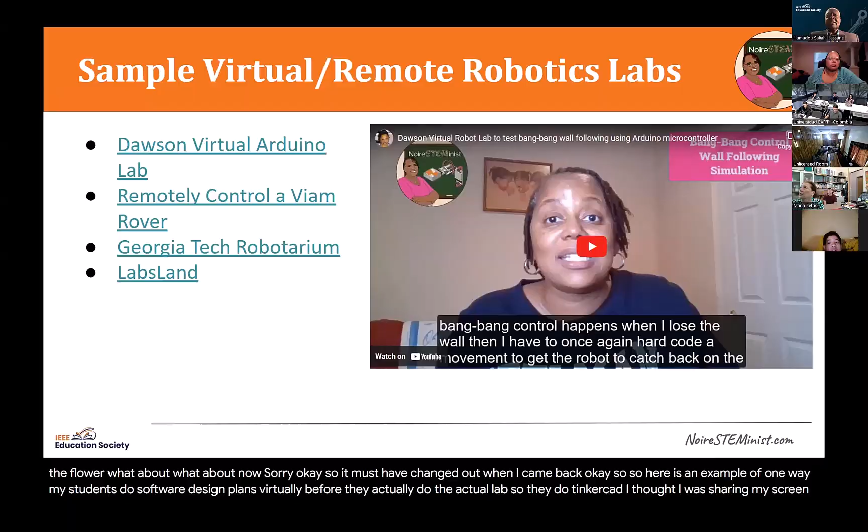Sorry, Abdulaziz, you are sharing your screen. Please stop. I thought I was sharing my screen. Yeah, but I saw someone from Niger sharing the screen. I cannot see your screen. Okay, I'm going to try it again. Let me try one more time and tell me what happens. I turned off multiple sharing. So now, what about now? What do you see now? Now we can see you. Okay. All right, Maria, did you need something as well? No, I'm good. I was gonna say something about the interruption. Oh, okay. It looked like Abdul was sharing something. I have now turned off sharing, so I'm the only one that can share. Perfect. Okay. So let me get the chat back open now.

Sorry about that. Okay. So here's an example of how my students do a pre-lab using learning objects online before they do the actual physical lab on the robot. And I will tell you that the robot they use in class is not the one that I shipped everyone. They use a robot that is a bit more expensive, obviously, but still the same thing applies.

So one of the labs they do is called bang bang control or wall following. So here's a simulation of what that looks like. I'm going to forward a little bit because I don't want to play the whole thing, but turns and forward and spin moves until you're within the correct distance to the wall, and then you just move straight ahead.

The other point of bang bang control happens when I lose the wall. Then I have to once again hard code a movement to get the robot to catch back on the wall, and then it goes back into on off until it collects all the coins. Please watch and enjoy.

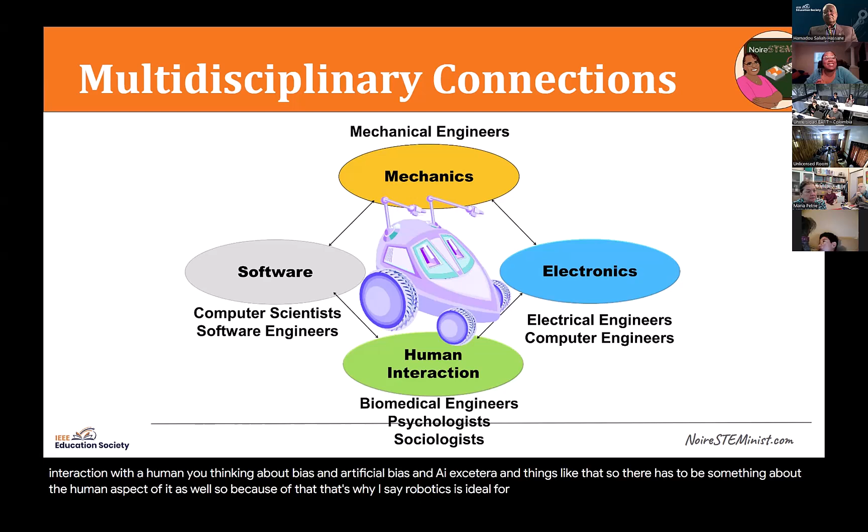And then there is going to be some type of interaction with a human. You're thinking about bias in artificial intelligence, bias in AI, et cetera. So there has to be something about the human aspect of it as well. So because of that, that's why I say robotics is ideal for STEM and STEAM, because sometimes the arts part of it is humanities or ethics, or how does it interact with a human in a way that feels safe, et cetera. So that's why I like robotics, because I can do so many things with it.

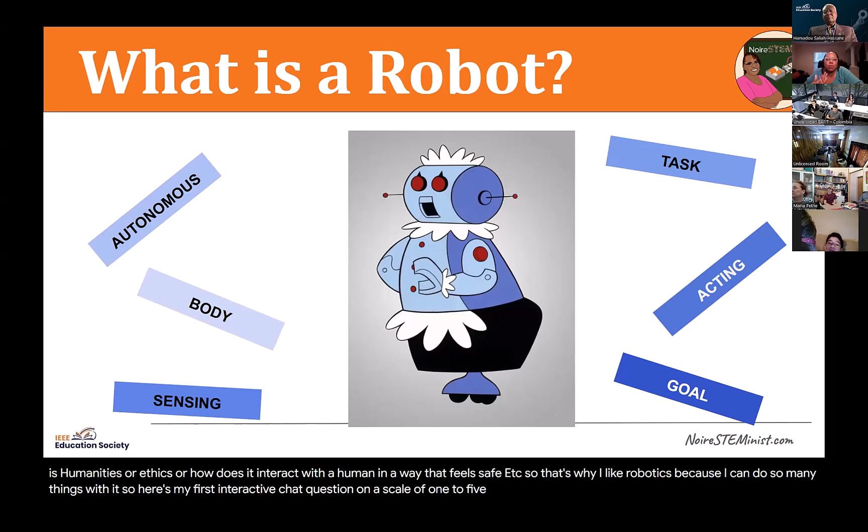So here's my first interactive chat question. On a scale of 1 to 5, with 1 being I know nothing about robots and 5 meaning I know lots about robots, put a number in the chat between 1 and 5. 1, I don't know much about robots. 5, I know a lot about robots. I want to see where the numbers are, because this kind of scales the way that I do my presentation. 1, I know nothing. 5, I know a lot.

I see a 2, 3, 5, 5, 1, 2, 3. I see a lot in the middle. 3, 3. I see threes. Okay, so it looks like people are kind of in the middle. I see 3.5. I do presentations for children and adults, and I use some of the same slides. So the level of detail I go into is closely related to how much I think you know.

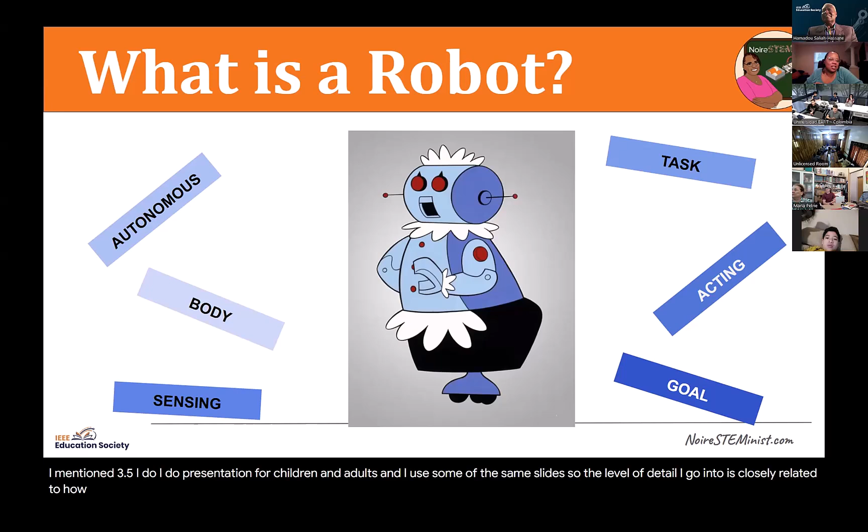So what is a robot? Simply put, a robot is a machine. It is a machine that is given intelligence through software. You know Rosie from the Jetsons? Yes, Rosie was the first robot I knew as well, which is why I have Rosie on my slide.

So it is a robot that is given machine intelligence through software, where the amount of intelligence may be based upon the number of sensors or the diversity of the sensors. Yes, Lost in Space was another big, very popular robot when I was growing up. So it's autonomous. Autonomous is how much can a robot do by itself?

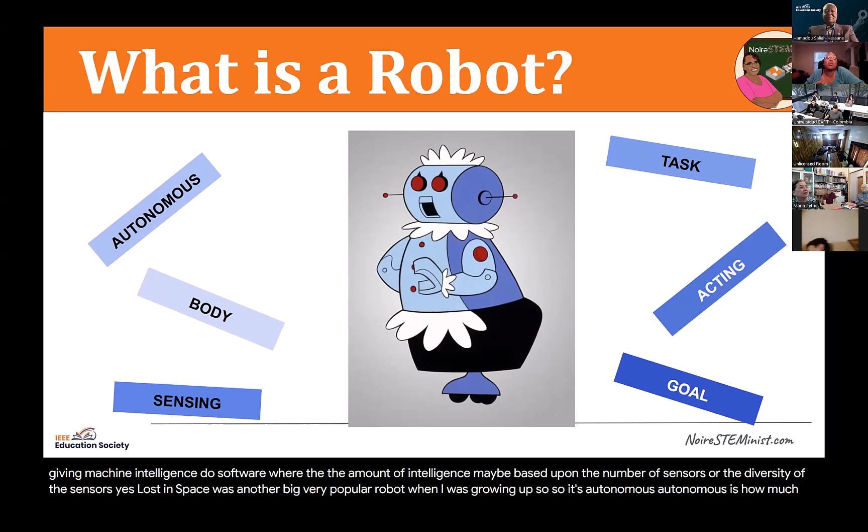If the robot does not need human intervention at all, then it's fully autonomous. That means it does not need help at all. If it's a remote control robot, which means you have to drive it and give it perception, it's teleoperated and it's not autonomous. Most robots are semi-autonomous, which means some things it's programmed to do on its own. But sometimes if there's a perception issue, which means it cannot figure out where it is or what something is, or if it gets stuck, the human may have to step in to help it.

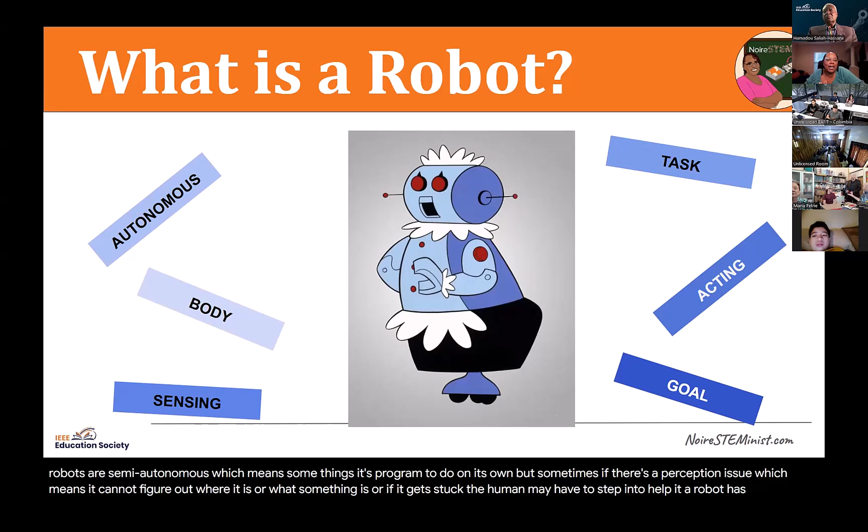A robot has a body. It's very important to state that a robot has a body, because there are things called web bots now. A web bot is a different kind of bot that basically scours the internet and looks for information. So the types of robots we're talking about have a body that is designed based upon what the robot will do. If the robot is going to vacuum your floor, it may be a little disc on the floor. If it is a drone, it may have propellers that fly over a stadium, etc.

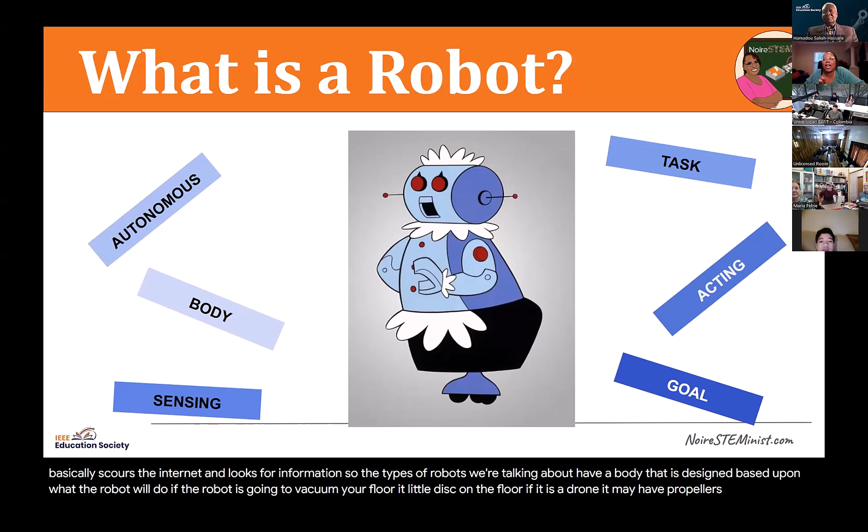A robot also will have sensors. The robot will have sensors based upon the task that it has to complete. So it may have color sensing sensors. It may have temperature sensors. It may have sonar or infrared sensors. So the sensors on the robot give it its intelligence as well, and you select the sensors for a robot based upon what the robot has to do.

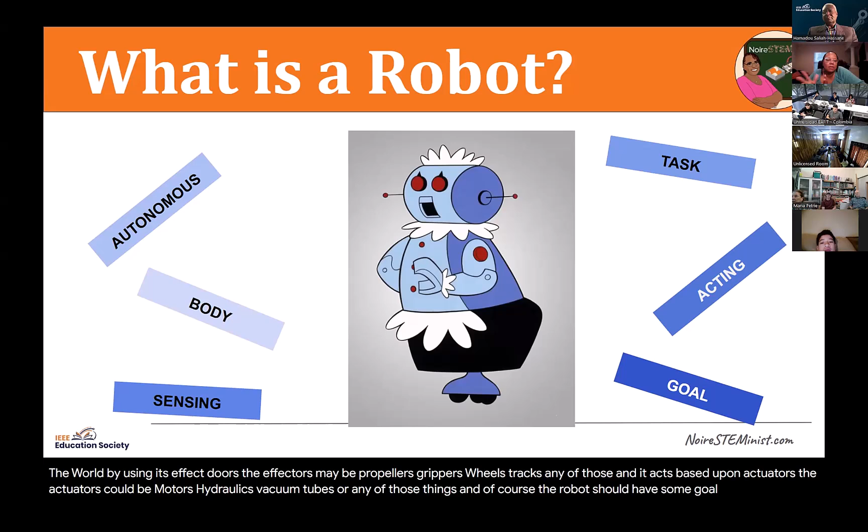Once the robot is given a task, it acts on the world. It acts on the world by using its effectors. The effectors may be propellers, grippers, wheels, tracks, any of those. And it acts based upon actuators. The actuators could be motors, hydraulics, vacuum tubes, or any of those things. And of course, the robot should have some goal. It's not really a robot if it doesn't have anything to do. It's a paperweight, so you have to give the robot something to do.

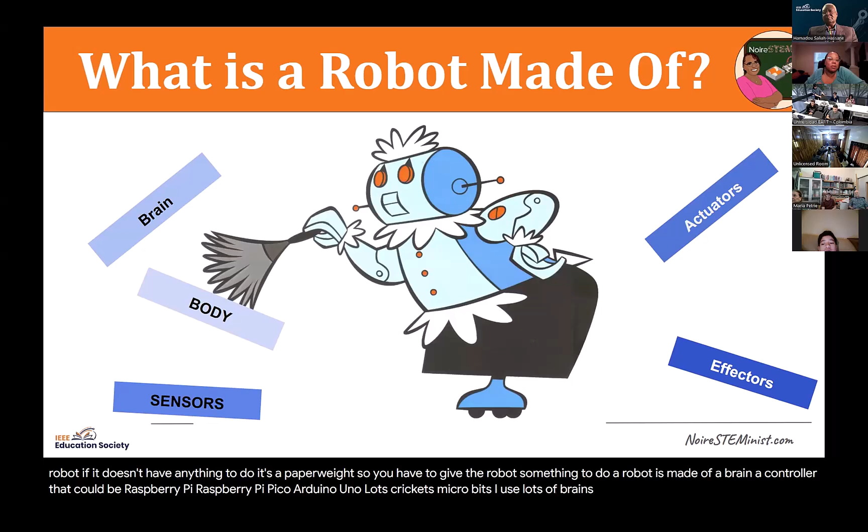Robots are ideal for 3 types of tasks. It's called the 3 Ds of robotics. Tasks that are dull, dirty, and dangerous. Dull task: a manufacturing facility, an industrial manipulator, a robot that is picking up a car door and sticking it on a car all day. That is something that if a human had to do it, one, would not be safe, and it would become dull because they would do it all day and they would start possibly making mistakes and injuring themselves.

Robots are also ideal for dirty tasks. I worked in a windshield manufacturing facility. There was a paint room. A paint room is not a place you want a human working all day because they would inhale those toxic fumes. So painting robots are an example of a dirty task, something you don't want a human to do all day. A dangerous task would be a bomb disposal robot, a robot that is looking for IEDs in the military. That's not something that would be safe for a human to do. Dull, dirty, and dangerous tasks.

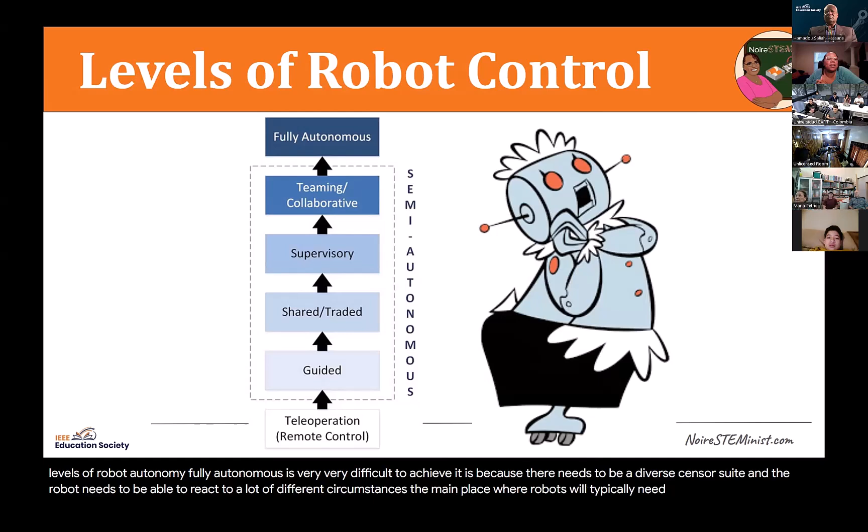So as I mentioned earlier, there are levels of robot autonomy. Fully autonomous is very, very difficult to achieve. It is because there needs to be a diverse sensor suite, and the robot needs to be able to react to a lot of different circumstances. The main place where robots will typically need help is in sensor feedback and perception so that it understands what's going on in its world. A fully teleoperated robot is like a remote control car. A remote control car could be considered a robot, although it cannot do anything on its own.

Guided control means the user tells the robot waypoints where to go next and what to do. Shared and traded control means that the robot and the human are like partners, and they share and trade control based upon being aware of what parts the robot can do well, what parts the human can do well. Supervisory control is where a human supervises the robot and only steps in when it sees that the robot has gotten into trouble, like it may have gotten stuck or it's not making progress towards a goal or a task. Teaming and collaborative robots, cobots, are big right now.

Cobots like the Baxter robot is an example. There's another cobot whose name I cannot think of right now. This would be robots that are like teammates and they actually work next to each other. Sawyer is another. Sawyer and Baxter robots would work next to each other in the manufacturing facility.

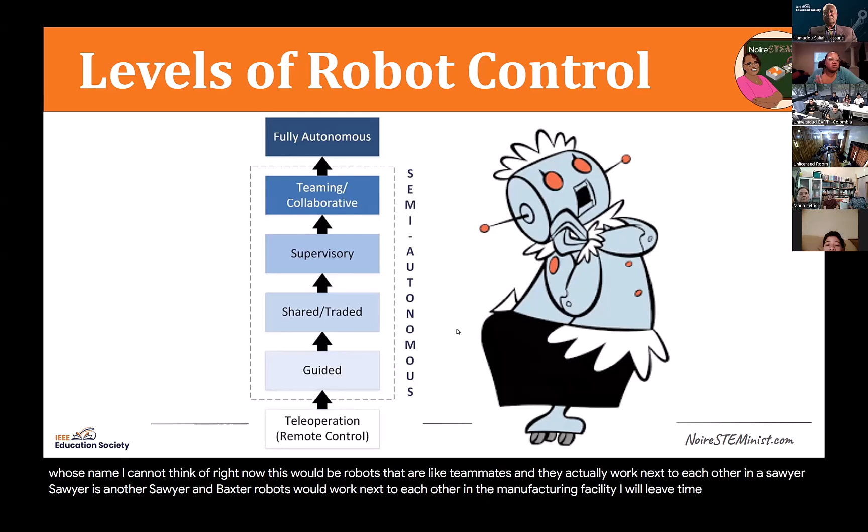So robots use sensors to see the world, such as a microphone to hear, a sonar to see, or a touch sensor on a gripper or force feedback to determine when it has picked something up. So the 3 robot primitives that we use to develop artificial intelligence on a robot are sense, think, act, sometimes also called sense, plan, act. The most important thing is the sensor is integral to a robot's intelligence. If the robot cannot tell what's going on around it, it cannot make decisions independently.

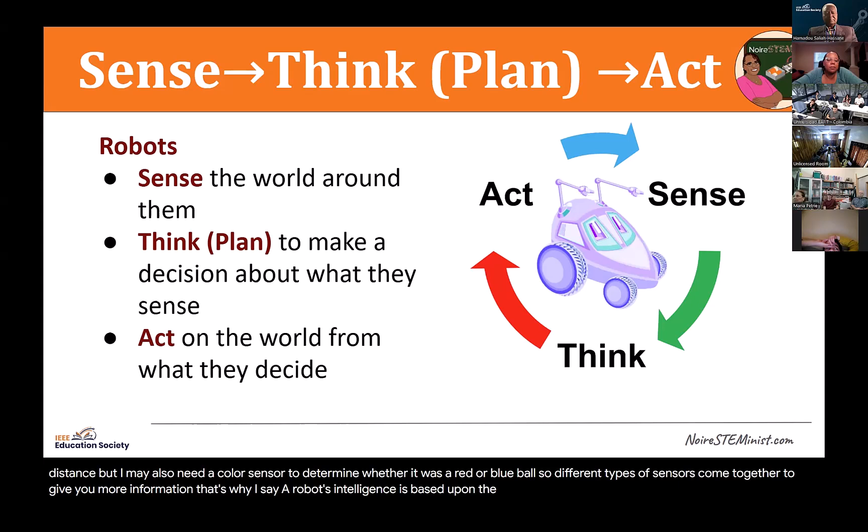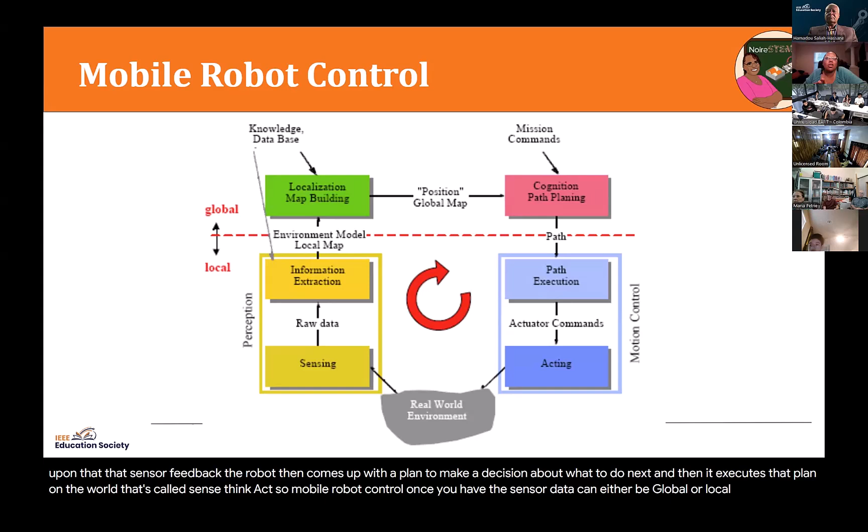That's why I say a robot's intelligence is based upon the number and diversity of the sensors that it has. Based upon that sensor feedback, the robot then comes up with a plan to make a decision about what to do next. And then it executes that plan on the world. That's called sense, think, act. So mobile robot control, once you have the sensor data, can either be global or local. Global control would be a robot that localizes, figures out where it is in the world, builds a map of the world, uses a position in the world to plan a path or follow a path.

Local on the robot is sensing and perception, like I said, sensing the world, using that raw data to get information. In other words, I've sensed something about the world and I know I'm next to a wall and I want to follow the wall. I've sensed something about the world. I saw a red ball and I want to push the red ball into the corner. That's where it takes that data and uses it to make a decision based upon the real world information. And then the action occurs where it either acts on that task or it executes.

So once again, the perception is an integral part of everything it does. A robot is in the real world or a simulated world like I use with my students. It makes a perception or an environmental model. It figures out where it is in the world. It comes up with some kind of cognition of what it wants to do, and then it moves.

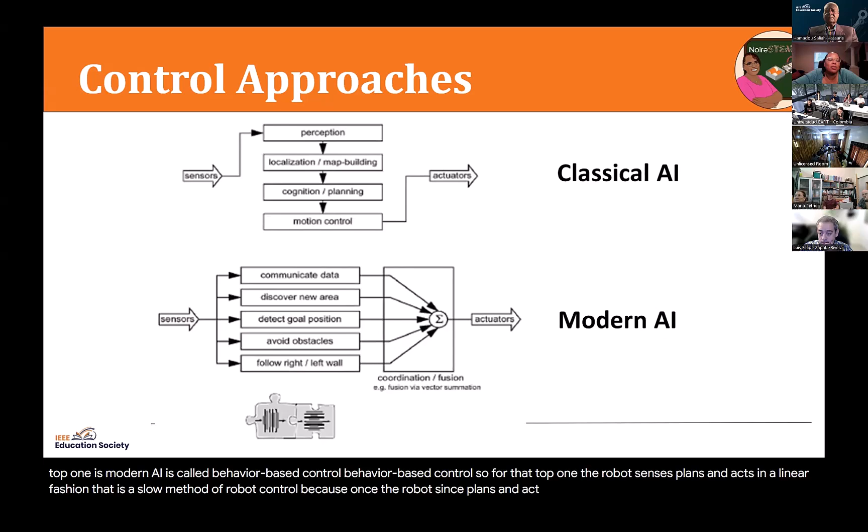There are different kinds of robot control architecture. Classical AI, or artificial intelligence, is called deliberative control. Deliberative control. Okay, that's what that top one is. Modern AI is called behavior-based control. So for that top one, the robot senses, plans, and acts in a linear fashion. That is a slow method of robot control because once the robot senses, plans, and acts, most likely the sensor data has changed. That's why people moved away from classical AI to modern AI, which is reactive control or behavior-based control, because the robot is constantly sensing, constantly getting feedback.

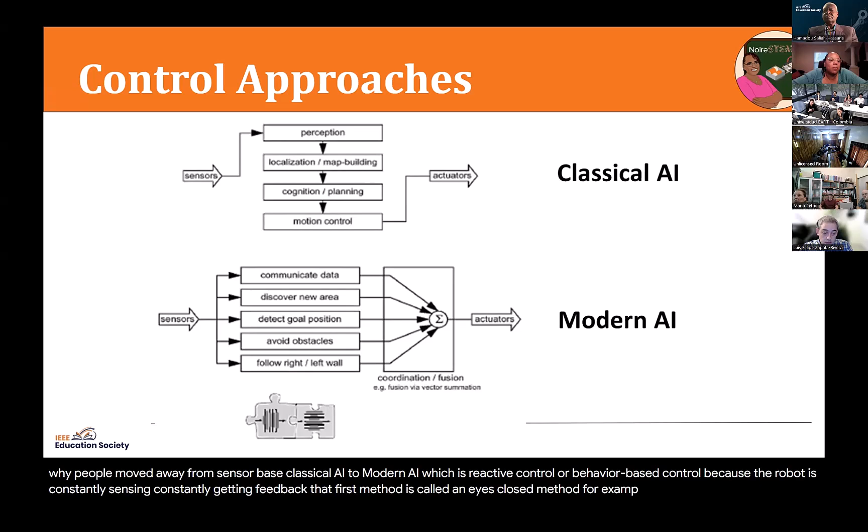That first method is called an eyes closed method. For example, the robot detects a ball, it goes through the whole plan, and then it begins to act on the ball. The ball's now no longer there. Or it detected a person, and then by the time it started to execute the task, the person had walked away.

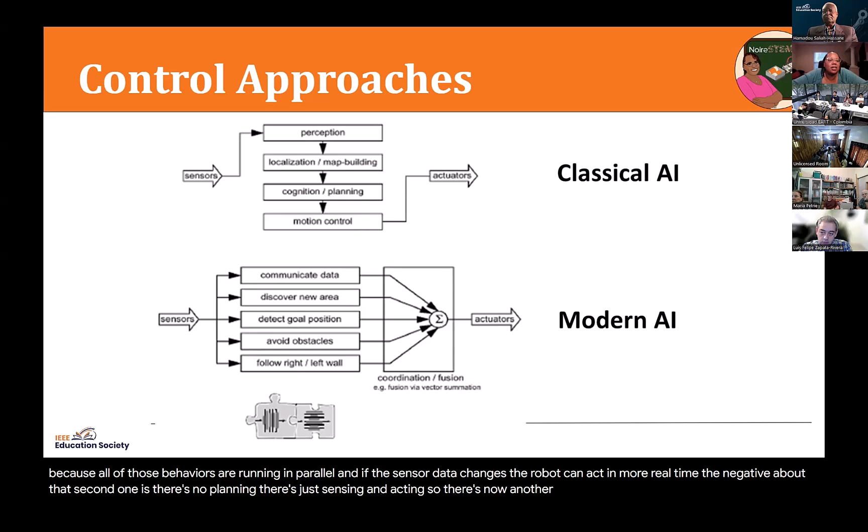So that's why the more attractive one, the one you see developed in the 80s called modern AI, is more acceptable, because all of those behaviors are running in parallel. And if the sensor data changes, the robot can act in more real time. The negative about that second one is there's no planning. There's just sensing and acting. So there's now another kind of control called hybrid control, behavior-based control, where some things are done at the planning level and some things are done at the reactive level.

So here is an example of how you would give feedback to your robot. It's called feedback control. Open loop control for a robot to follow a wall would mean it detects the wall and it just starts driving. If it never measures again, if it's hitting the wall, it has no idea. It doesn't adjust, and it probably is not going to follow the wall for very long. What you would want to do is add a sensor.

So my robot follows the wall, and proportional to how close it is, the robot turns left, turns right, stops, etc. And it is constantly polling sensors to determine where it is. We do this with a microcontroller. So the robot takes the sensor data, measured in terms of voltage, converts that to a distance, and then it uses that with proportional, PI or PID control to determine where it is, okay?

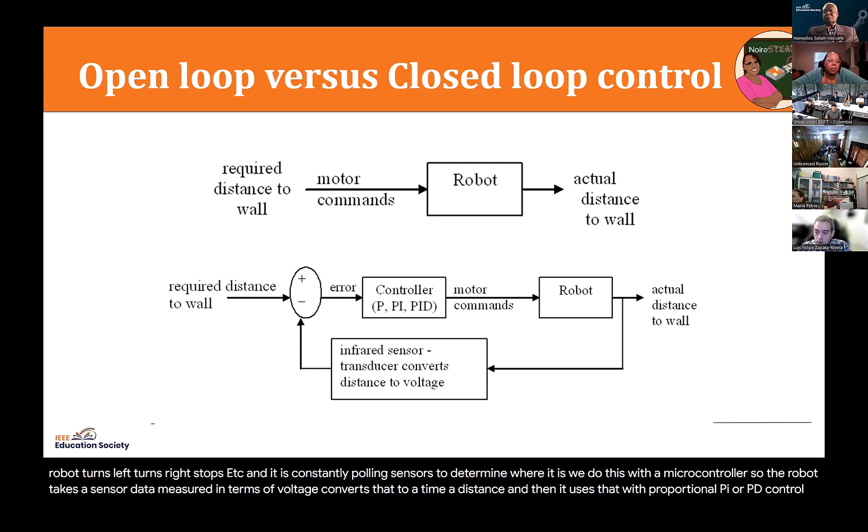Here's an example of what that looks like. I have a robot that is going to follow the center of a hallway. Proportional control has a lot of oscillations. It may get down the hall, but it won't be very centered. Then PI control, it'll be centered, but it has oscillations. So now you're at the integral control, and that gets rid of the steady state error. This is called reset and rate control. The derivative control, the rate, stops the oscillation. Reset, the integral control, corrects for steady state error, okay?

I did not ask for everyone's level, but I'm hoping I'm not giving so much detail about the controls that you're completely lost, but hopefully it makes a little bit of sense to you.

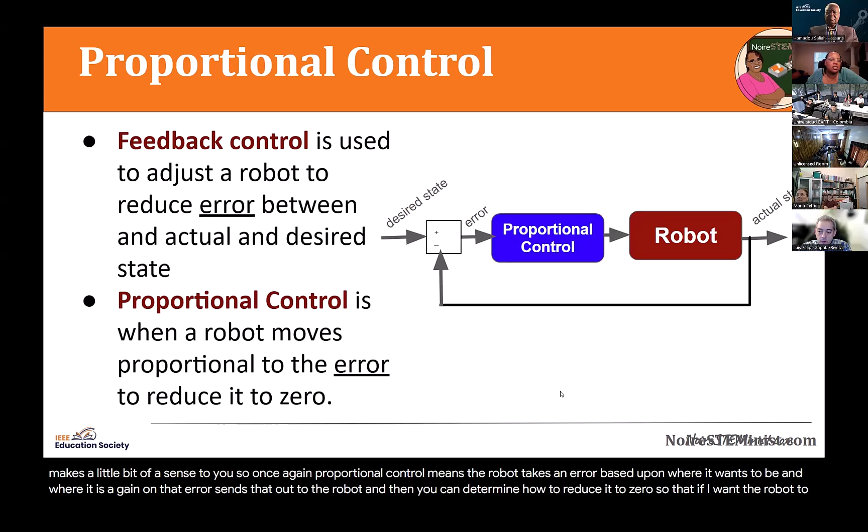So once again, proportional control means the robot takes an error based upon where it wants to be and where it is, a gain on that error, sends that out to the robot, and then you can determine how to reduce it to 0, so that if I want the robot to follow down the center of a hallway, it's able to do that.

Okay, so here's another example of proportional movement where I want to move the robot a certain amount forward, and I use an encoder. An encoder counts robot wheel turns or clicks, and it determines how close it's gotten. And so based upon where it thinks the robot is, how close it is, the robot will adjust in order to move a certain distance.

Another way of illustrating this exact same concept is with a flow chart. I had mentioned earlier that I have my students present their software design plans in different methods, whatever they're most comfortable with. So here will be another way of determining how far a robot moves based on a counter, where you want it to slow down proportional to how close it is to stopping. We know you need to decelerate, otherwise the momentum will carry you past the stop point. So here's a way that you could do that with a counter.

Yes, diagrams are great. I'm a visual learner as well. That's why I show lots of images and videos.

So once again, here's another one where the robot has to move away from something by 10 inches, kind of like wall following, except this is obstacle avoidance, where it's trying to move back to keep from hitting something.

And here's what that would look like as well, where if the robot is within 2.5 inches of an object, it moves away at 100% because it's really close. If it is less than 5 inches, it starts to slow down so that once it gets to 10 inches, it moves slowly and then it stops. So it's just the opposite of the other one. The other one was moving forward at a distance. This one is moving away from an object at a distance.

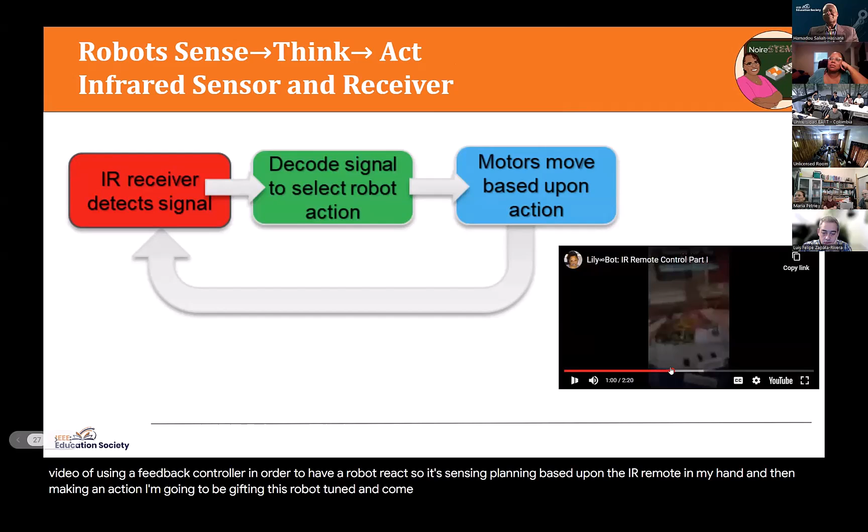Here we have our infrared remote, and then here we have our infrared receiver. And we're going to walk through the things that the robot does, and then we're going to show how to wire it up and write the program. So the power button makes the robot spin. Then we have a volume button, makes the robot move forward. We have a button that makes the robot spin the other direction.

Then we have a button to make the robot go forward. The robot sing and dance. We have another button to make the robot turn. Let's move it back because we don't want little buddy to drive off the table.

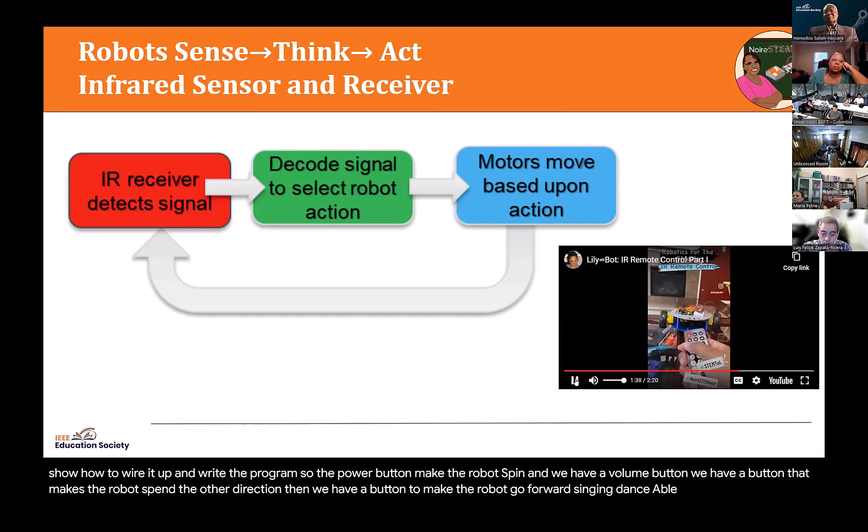So that is an example of sensing, planning, acting. The infrared receiver on the robot is the sensor. I have written the plan out in my code, and when I push the button, the action happens because of my code. Okay, here's another example of this with a light sensor.

This robot has a photoresistor on it, and that resistance changes proportional to incident light. And I have written the code to have the robot act out some type of behavior based upon how much light it sees. You can use this to make a robot that is in love with light or light tracking. These are called Braitenberg vehicles. So it either moves towards the light, it moves away from the light, it runs towards the light, etc.

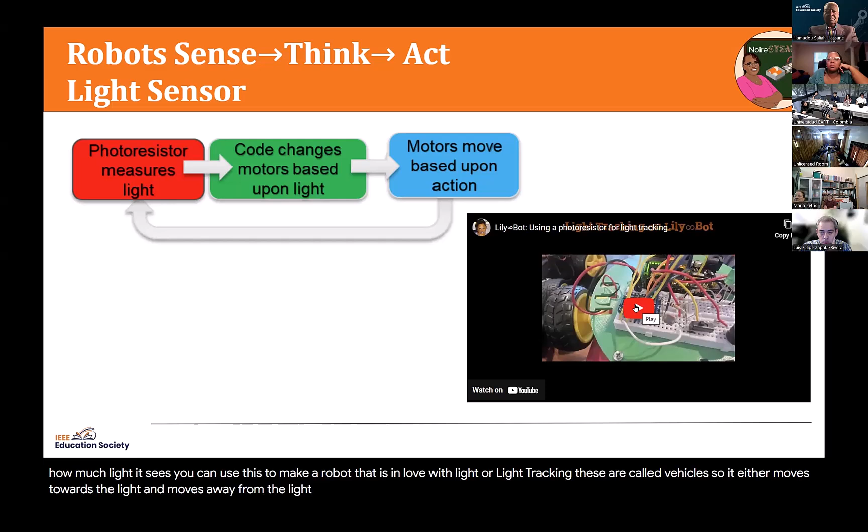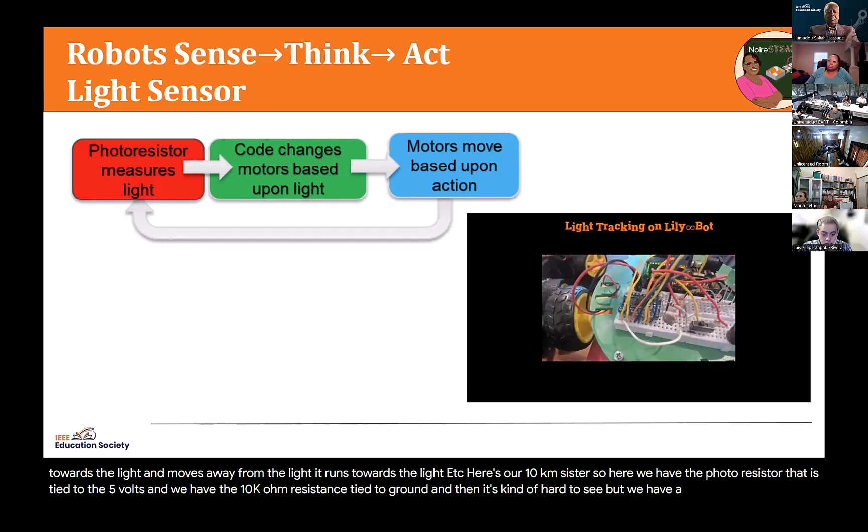Resistor. Here's our 10 kilo ohm resistor. So here we have the photoresistor that is tied to the 5 volts, and we have the 10 kilo ohm resistor that's tied to ground. And then it's kind of hard to see, but we have a blue wire here that goes over to A0.

So first you're going to turn the robot on. And what you'll see is that it immediately starts going at top speed because it's seeking out more light. So when it gets enough light, it stops, which shows love of light. And then if the light starts to dim, it starts moving back because it wants more light. The darker it gets, the faster the robot goes.

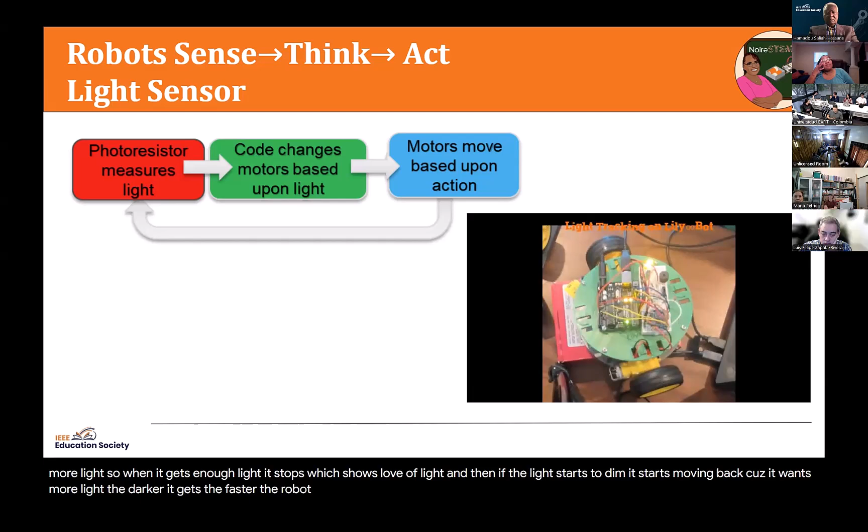So once again, the more light I bring, eventually when it's basking in the light or love of light, the robot stops. But as I take the light away, the robot starts moving. That's an example of proportional control. The robot's motors are proportional to the amount of light that the robot sees.

Okay. So another way of showing robot behaviors is called subsumption architecture or a state machine. A subsumption architecture is layers of robot movement where they subsume or inhibit the other layers by what's going on. This bottom layer is called obstacle avoidance, which means the first priority is for the robot to move safely in the world and not hit anything.

Then if there is light and there's no object in the world, the robot should try to either move toward the light, move away from the light, or be at the light. So the actions are turn and forward. The sensings are move to the light and run away. And these layers happen interactively where they turn on and off based upon if I see light, if there's an obstacle. The obstacle is obviously more important to get away from the obstacle and then to track the light.

So my students also make these kind of software design plans so that when I'm grading their work, I can see what code they wrote and what it should do. And then this table down here explains in more detail. The light triggers the photophilic behavior, and that triggers the motor schemas to move to the light. There's a perception of the light as well as the brightness of the light.

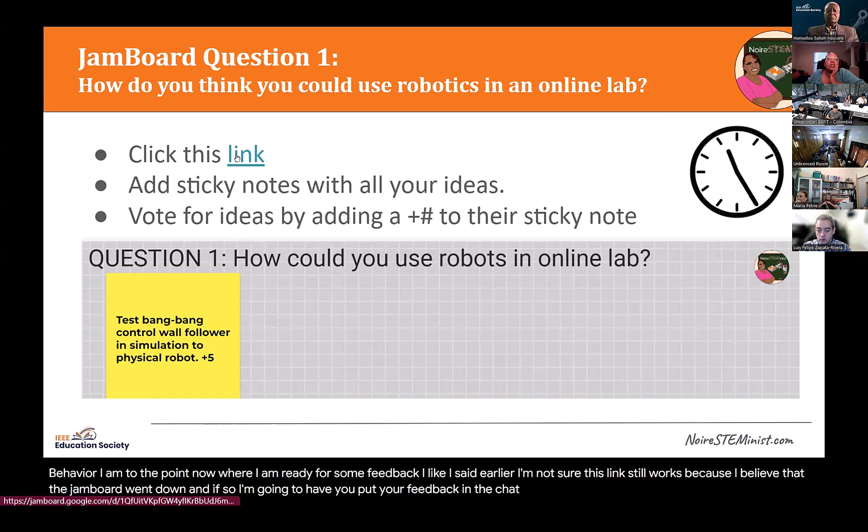Okay, I am to the point now where I am ready for some feedback. Like I said earlier, I'm not sure this link still works because I believe that the Jamboard went down. And if so, I'm going to have you put your feedback in the chat and we're just going to download the chat. But hold on, let me try the link first. And if the link no longer works, then we'll do the chat. Actually, it looks like it's still up.

So I'm about to paste this in the chat and I want you all to take a couple of minutes and go in and answer the question. Now that I've given you some high-level descriptions of robots, how do you think you could use robots in an online lab? You should be able to go in here and make a sticky note and add your thoughts. Notice that we've had some sticky notes in here before.

I'm trying to find the sticky notes. Okay, so it looks like they're getting rid of this on December 31st now. Where are the sticky notes? I don't see the sticky notes anymore. What happened to the sticky notes? Oh, it's under view only. Why is that? Hold on one second. Let me see if I can figure out why it changed to view only all of a sudden. Anyone with the link should be able to edit. Let me try this again. I'm going to put it in the chat. And I'm going to refresh this. I don't know why it's saying view only.

Huh. All right, we may have to end up using the chat. You can view this document; to make changes, ask the owner for edit access. I am the owner. Maybe it was under a different one of my accounts. Hold on one second, please. I have multiple Google accounts, so I have to see why I am not able to. I think they're getting ready to retire it, and they're giving you till December 31st to download whatever you have. But they won't let you put anything on it anymore. I think you're right. Okay, everyone, please put your ideas in the chat. Always taking away our favorite tools.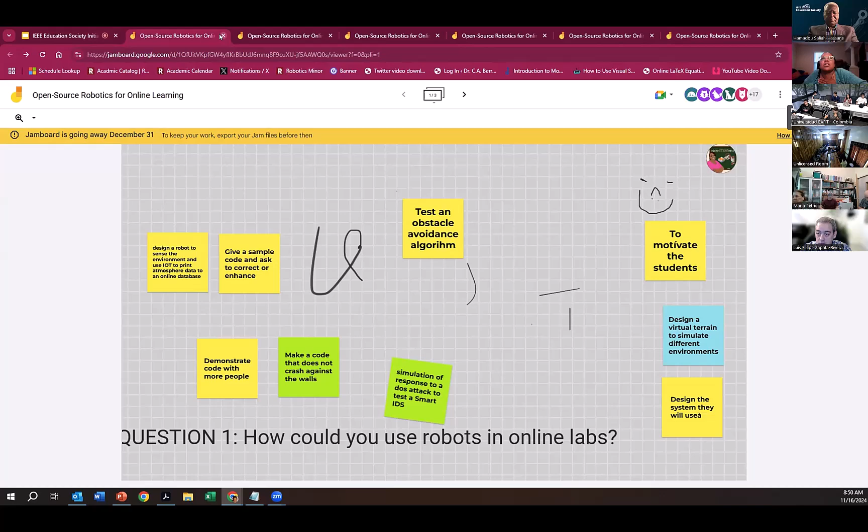Once I see the chat start to slow down, I'll move on to the next topic. All right, so let's do a little feedback since we're here waiting anyway. On a scale of 1 to 5, thinking about your level of understanding of my presentation while people are putting in their thoughts. Well, let's do 1 to 5 again. 1 is I'm completely lost and I don't know what you're talking about, Professor Berry. Number 5 is I know all this already. I'm not being challenged today.

Okay, I see a 2. Very good. And a 3. 3s. I see lots of 3s. Actually, 3 is hitting about on the right point. I think if you're 3, that's pretty good. 1, I need to do a better job. 5, I'm sorry. I can't give you more today. Go and look at my YouTube videos online. Okay, 3. Most people are 3.

Amadou says can't be 5. Okay. And keep the ideas coming too. I love that. I'm going to get all the ideas out the chat at the end of today. Great. Sorry, Luis. I need to give you more. Okay. Okay. I am now going on to the next slide.

So introducing my robot. So all of this is leading. You asked about the applications, but we didn't see too many answers about what people are expecting to use a robot for. So somebody put control systems lab, 100%. I also teach controls. Automated sorting station. So that would be a lab as well.

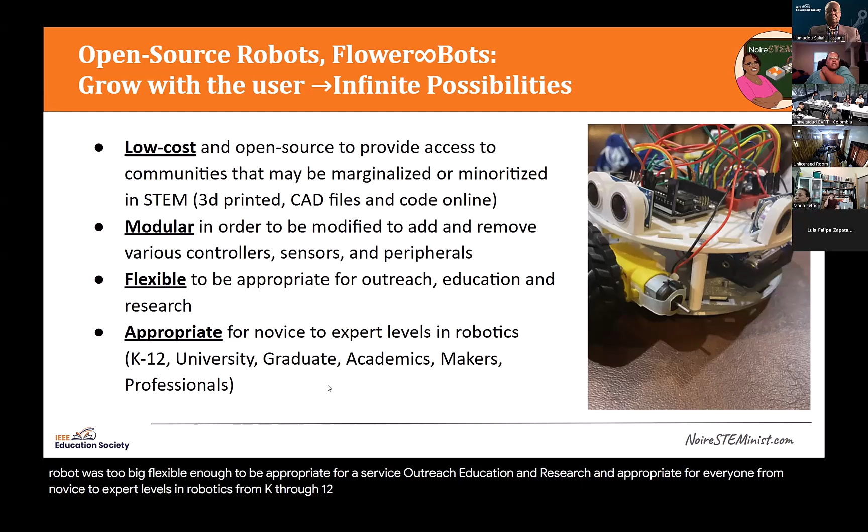I've had people take my files and make them smaller. They said the robot was too big. Flexible enough to be appropriate for service, outreach, education, and research, and appropriate for everyone from novice to expert levels in robotics from K through 12, university, graduate, makers, professionals, and more.

Here are just a few examples of my robot being used by college students for high school competitions. And then here's one in the middle. This is how you build and program your robot. These are high school kids. Their teacher downloaded my robot from TikTok.

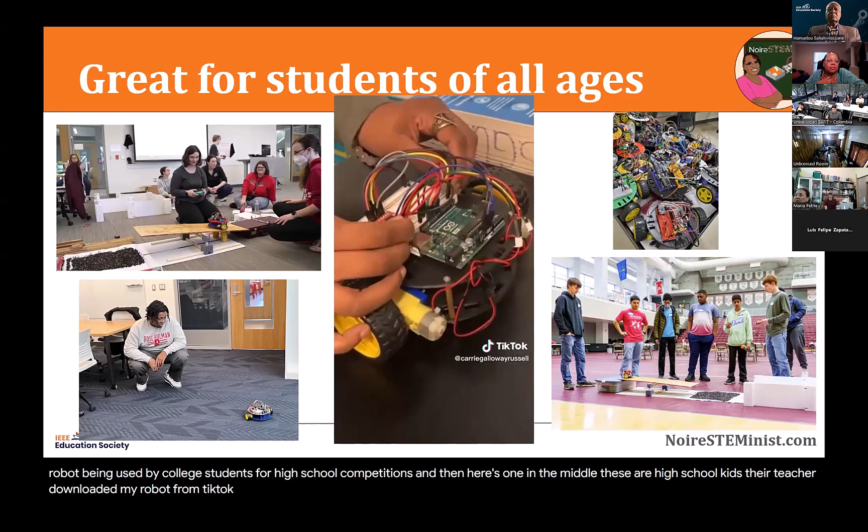First, we assembled the robot by watching a YouTube tutorial. Then we wired the robot. Then we created a code for the robot to perform. The most challenging part was wiring the robot. The most interesting part was coding the robot and watching it perform.

So robotics for the streets means I use social media actively to promote my work. And I have had people who found my robots on TikTok and made them, Mastodon and made them, Twitter, Instagram, you know, wherever. So that's a big part of robotics for the streets, is taking my robots out of my classroom and taking them where I can meet the people who I think would be awesome members of the STEM community, but may not have access to an engineering classroom and that technology.

This is also why I put my materials on YouTube, Instructables, and everywhere where people can go to learn about these things. So Maria, these next two slides are because of your requests. So I made these last night for you. And you had asked me the differentiator between Lilybot, DaisyBot, and RosieBot. I mostly do Lilybot right now because there's been such a demand. I haven't had time to work on the other two yet, but we're still tweaking them.

Lilybot was primarily designed for service for the novice learner, K through 12. And right now it is able to work with a micro:bit, Arduino Uno, Raspberry Pi Pico W, Circuit Playground Express, and we have used it for service and education for children and adults. DaisyBot would be more for an intermediate learner. It's a larger robot, so it would be for also K through 12 or university. We have had it working with an Arduino Mega.

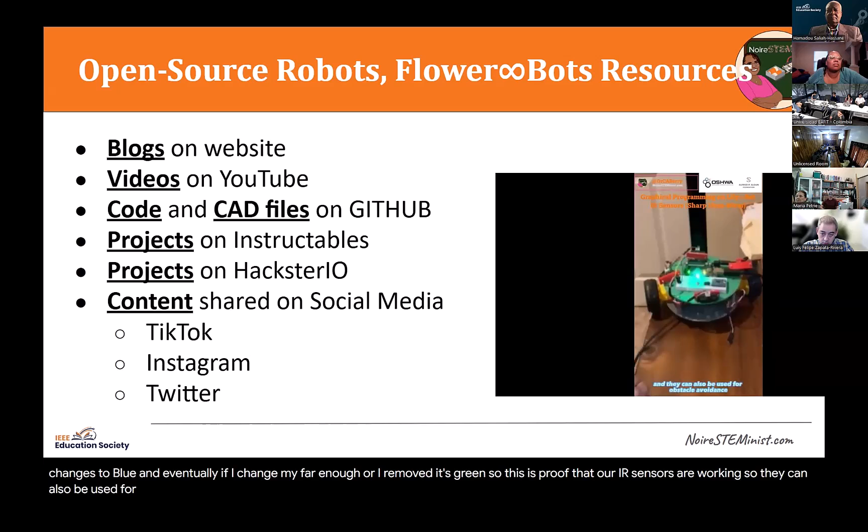And here is an example of where I did the same workshop for engineering professors so that they can then go into their community or go back to their school and use these robots to teach their kiddos.

Even educational robotics can be very expensive, $200 to $300. Robotics competitions can be in the thousands for kids to participate. So if you're from an under-resourced area, it's very difficult to get involved. And even if we get past the cost, sometimes there's a knowledge barrier. You just may not have teachers or adults in your area who know enough about electronics, mechanics, and software to help you with robotics projects. I have created an open source robot that is mostly 3D printed, which means it's low cost. And because it's open source, it takes care of the access problem: anyone who can get to the internet and YouTube can look at how to make their own robot, print it, and program it.

So I came up with this idea because it was a way to get teachers and communities like Girl Scouts, Boy Scouts, and things like that into robotics without them having to break the bank. What they're going to learn today is how the 3D printed robot was made, as well as how to convert it as your skill level improves.

So we're going to start with graphical programming, like making your Blockly by using MakeCode micro:bits, and then we're going to move on to Arduino Uno, which is text-based. So as we're changing the controller on the robot, it's going from K through 12 elementary to college level, university level, and maybe even graduate school, so that one robot is growing with you as your skills improve.

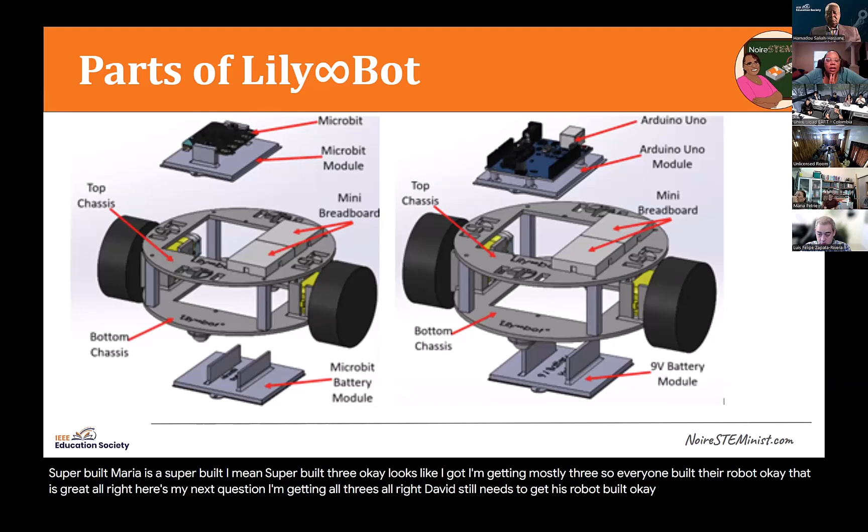Three. Okay, looks like I'm getting mostly three. So everyone built their robot. Okay, that is great. All right. Here's my next question. I'm getting all threes. All right, David still needs to get his robot built. Okay. If you built your robot, next question.

One, I have done no programming on the robot. Two, I've done a little programming on the robot. Three, I've done a lot of programming on the robot. Three, a lot of programming. That's great. Two, some programming. One, no programming on the robot, I just built it. All right, I see a two and a three.

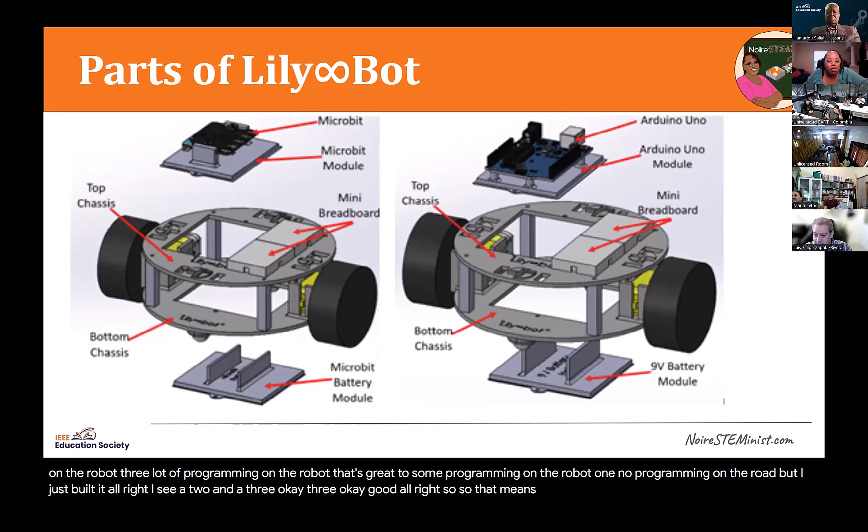Okay, three. Okay, good. All right, so that means I will go over high level how you put the robot together, because it looks like most of you did build your robot. So I'm basically talking to the people who have not had time to build their robot yet. Okay. And I also put one more link in the chat. That was the last one for David. I now think I have every link that David needs.

Okay, now, so the parts of the robot, it's 3D printed, like I said, everything that's not electronic. So the holes are what makes the robot modular. So depending upon what controller I put on the top, I put a battery pack on the bottom in order to give that power. So if it's a micro:bit, it could have a 9-volt battery pack. It could have a 4 AA battery pack or battery module.

I then have a mount for a Raspberry Pi Pico W. I have a mount for an Arduino Uno. I may have a different battery pack. Same motors, same wheels. As long as it's a Lilybot, the chassis is the same. But if you really do exhaust everything you could possibly do with a micro:bit and a motor bit, you can always just swap out the controller and keep the robot.

So this is the flexibility in the design in order to continue to grow with the robot, thus the name Flower. Okay. And here is what the Arduino Uno looks like that you have built. I think I sent most everyone a 9-volt battery pack. You could also do the same thing and use a 4 AA battery pack, but I think I sent everyone the 9-volt battery pack.

The motor controller. There are different kinds of motor controllers. There is a SparkFun RedBoard motor controller here. There's a TB6612 motor controller, which I believe is the one that everyone got. And then you just start adding things to your robot and programming.

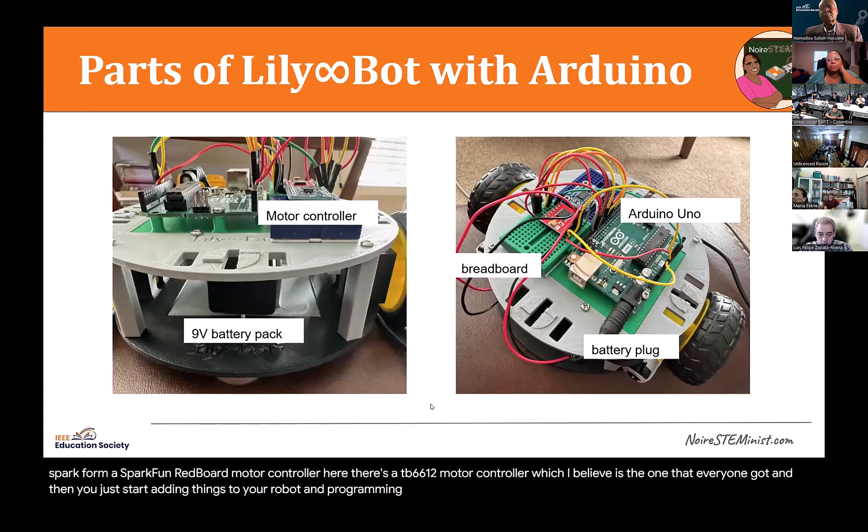So this is called an embedded system. An embedded system basically is a robot. It takes data from the world, then it performs some actions, and then it outputs that data. So your Arduino Uno is what creates our embedded system, which is now the brain of our robot.

So an Arduino Uno is probably the most basic Arduino that most people have. It's a great platform for first learning microcontrollers. I use Arduino in my classes because there's so much online material on Arduino that even if you don't have me, you should be able to get online and find resources that you need.

There's 14 digital I/O. There's a pulse width modulation output, which is basically how you would play a buzzer or something that requires frequency or analog data, as opposed to digital, which are ones and zeros or on and off. And you have a power jack and a reset button.

So it's an embedded system that takes in data from the world and outputs data, in this case, to our robot, and it uses general purpose input and output in order to get sensor data or to send output to like a buzzer or to an LED or to a gripper. Like I said, digital data are ones and zeros. It's like a light switch that you turn on or off.

Analog data is data that is anything along a real number line. An example of an analog sensor would be a sonar sensor or an infrared sensor. It can take any number between 0 and 5 volts proportional to distance. An example of an analog output I just told you would be a buzzer. A photoresistor is an analog input. A potentiometer is an analog input.

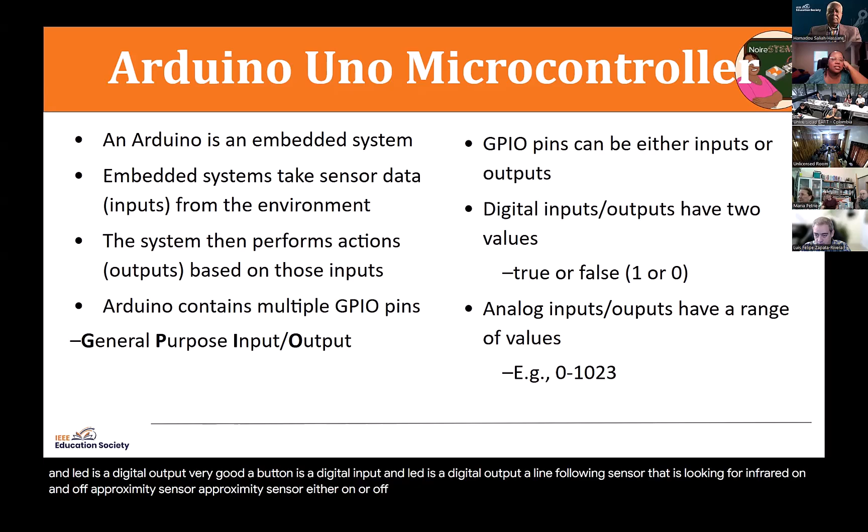A button. An LED is a digital output. Very good. A button is a digital input. An LED is a digital output. A line following sensor that is looking for infrared on and off. A proximity sensor, either on or off. LED is a digital output. Very good. LED. First one we always talk about.

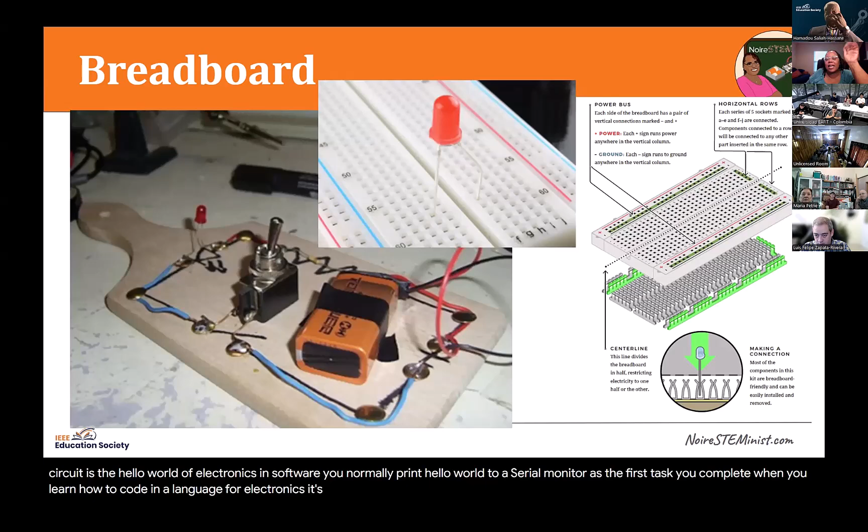The LED circuit is the hello world of electronics. In software, you normally print hello world to a serial monitor as the first task you complete when you learn how to code in a language. For electronics, it's getting an LED to turn on, and that's the first thing we're going to do today.

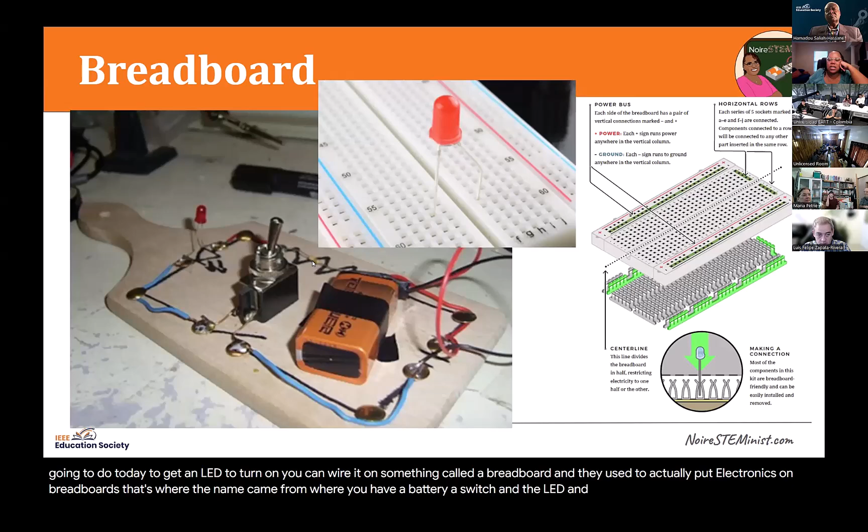To get an LED to turn on, you can wire it on something called a breadboard, and they used to actually put electronics on breadboards. That's where the name came from, where you have a battery, a switch, the LED, and a resistor in series with it. You put the resistor in series with the LED because you don't want to burn the LED up, and that limits the current and drops voltage across the resistor.

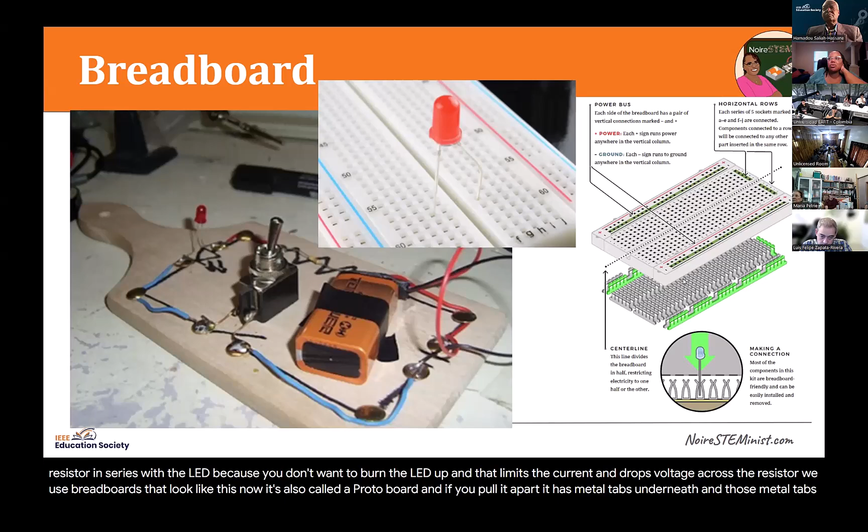We use breadboards that look like this now. It's also called a proto board. And if you pull it apart, it has metal tabs underneath. And those metal tabs are used to make connections between the electronic components. The meeting point of the components is called a node. And when I make them connect, like these wires and metal tabs are doing, I can turn the LED on.

It's coming. The obstacle detection, your sonar sensor, it's coming. If I don't get there today, you can watch the video, but I'm going to try to get you to obstacle avoidance before I log off today, Abdul. That's my goal.

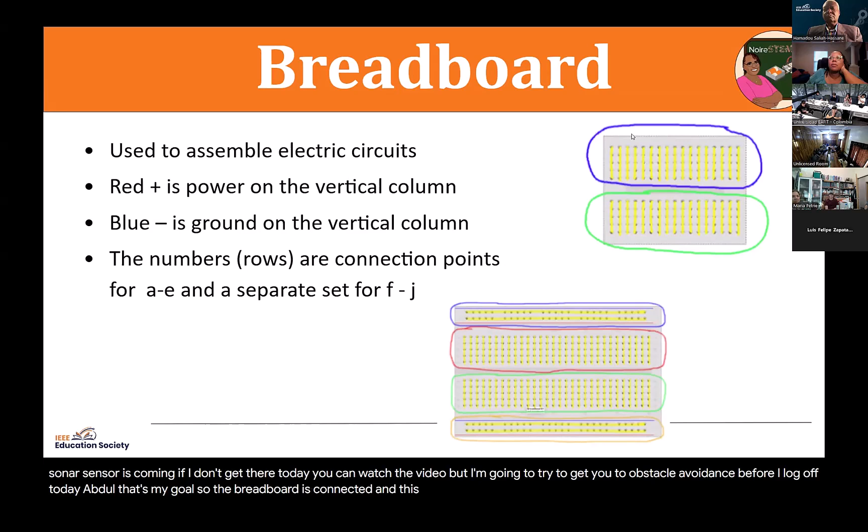So the breadboard is connected, and this one at the top is the breadboard on your robot. Every row is a different node. So if I want 2 elements to touch, I put their legs in the same row. If you think about these as letters, A through E would be one node, F through J would be one node. Then if you think of the numbers coming down the side, 1 and 2 are different nodes, just like A through E and F through J are different nodes. So when I tell you to put something on your breadboard so that it touches something else, they have to be in the same row.

Resistor color code. If I mailed you a kit, all your resistors are probably in the 100 ohm range, which means they can be used for your LED, 100 ohms, 200 ohms, 300 ohms, etc., or a 10 kilo ohm. I sent you a 10 kilo ohm resistor.

Do not put the 10 kilo ohm resistor in series with the LED. The LED will not turn on. It's too big of a voltage drop. You have to use the 100 ohm resistors for the LED. The 10 kilo ohm resistor is for the photoresistor or the potentiometer.

Photoresistor or potentiometer is 10 kilo ohms, which means a 10 kilo ohm resistor in series with it will be a proportional drop in order to read that data. If you mix the resistor up, you'll know immediately because it won't work right.

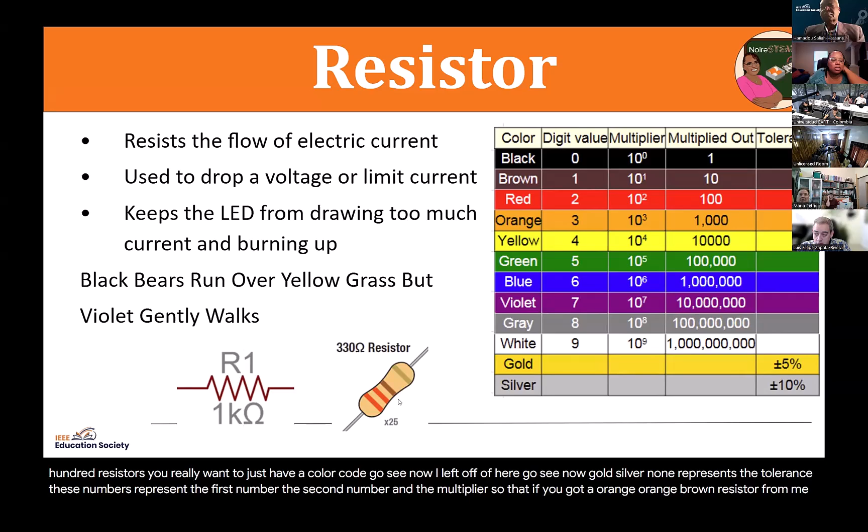So what you're going to do is you're going to put an LED in series with the resistor, and instead of a battery, your microcontroller is going to turn on the LED. So you're going to put an LED in series with a resistor. Anode is the long leg. Cathode is the short leg.

If you put an LED in backwards, it will not turn on. Current has to flow one direction. The ground connection has a flat rim on the cap of the LED as well. So we've talked about, you can have analog data, digital data, or mixed data.

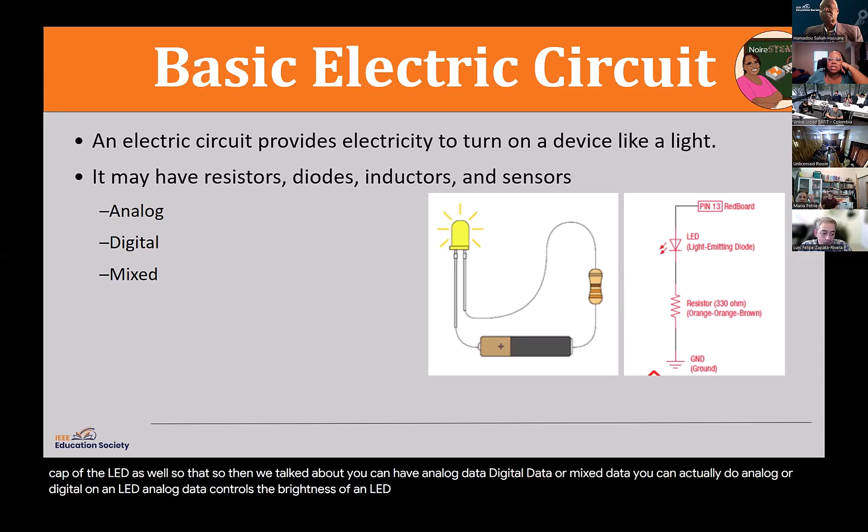You can actually do analog or digital on an LED. Analog data controls the brightness of an LED. Digital turns the LED on or off, okay? So these are some SparkFun images that I use because they're easy.

I need a bright flashlight to read the resistor codes. Now with my old eyes, I know, Mark, I'm sorry. I do too. I have a big magnifying glass that I use.

So here is an example of connecting LEDs to buttons and a resistor. So this is now using a digital input to turn an LED on. So you're seeing digital input and digital output at the same time. I'm not explaining these circuit diagrams too much because I don't know how many of you guys are electrical engineers, and I'm trying not to overwhelm you with too much technical stuff.

But over here, these diagrams are basically what you would build on here. So there's a symbol for an LED, there's a symbol for a resistor, and then pin 13, pin 3, and pin 2 would be microcontroller connections. And then up here are the resistors. So here are pull-up 10K resistors for a button. You don't have to do this because there's an internal pull-up on a microcontroller. And then the 330 ohm resistor for the LED.

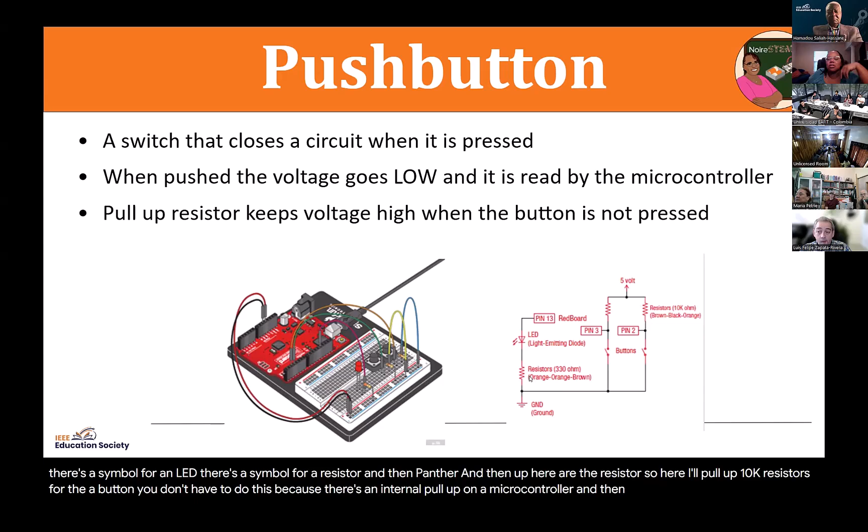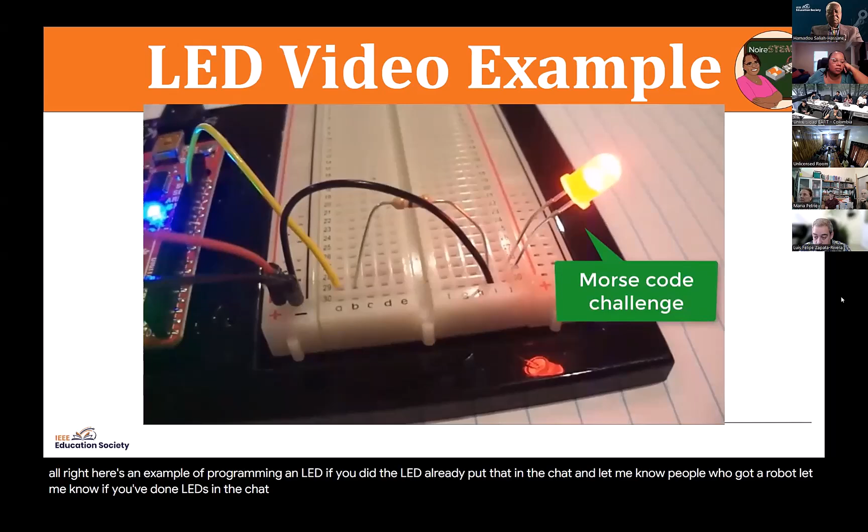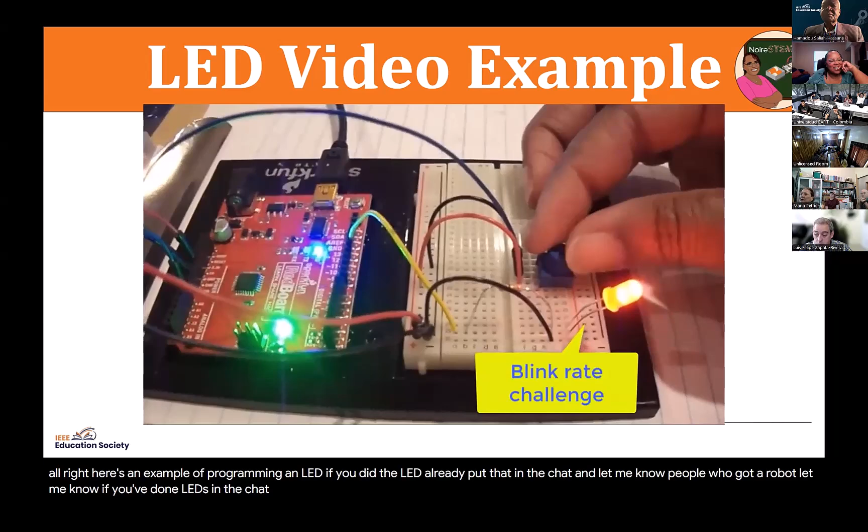All right, here's an example of programming an LED. If you did the LED already, put that in the chat and let me know. People who got a robot, let me know if you've done LEDs in the chat. All right, I see a lot of dones and yeses, so I'm moving on. Remember, you are dictating the pace at which I present. If I'm seeing you've done it, I'm moving on.

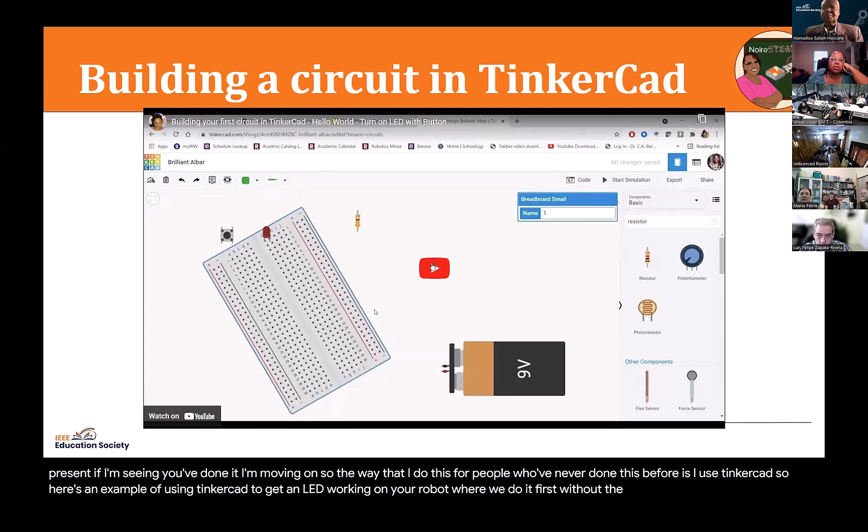So the way that I do this for people who've never done this before is I use Tinkercad. So here's an example of using Tinkercad to get an LED working on your robot, where we do it first without the microcontroller. We do it with a battery. And since you did this, I'll just speed through it. But basically, then it would go through the cathode to ground.

Let me show you what happens if I don't put the button in. I take this wire and connect it directly there. And I press start simulation. The LED turns on. Ooh, it's magic. Y'all ain't no fun. All right, but I don't want to do that. I want to show you how to use a digital input. So I'm going to take that out.

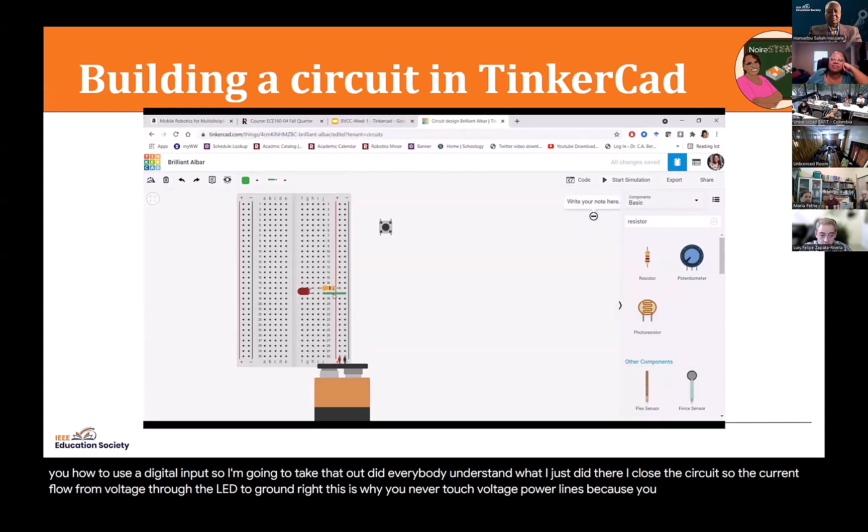Did everybody understand what I just did there? I closed the circuit so that the current flowed from voltage through the LED to ground. This is why you never touch voltage power lines, because you have a resistance and the current would flow through your body to get through lower resistance to get to the other end, and it could shock and stop your heart. And that's how people get electrocuted when they get touched by a power line. Full of fun facts. Okay, so I'm taking this away.

I'm rotating my button so that I can put it over the ditch. Remember, you have to put things over the ditch so you don't short it out. So I've got to put the button there. All right, it doesn't work otherwise. Put in the chat if you got the button working on your robot.

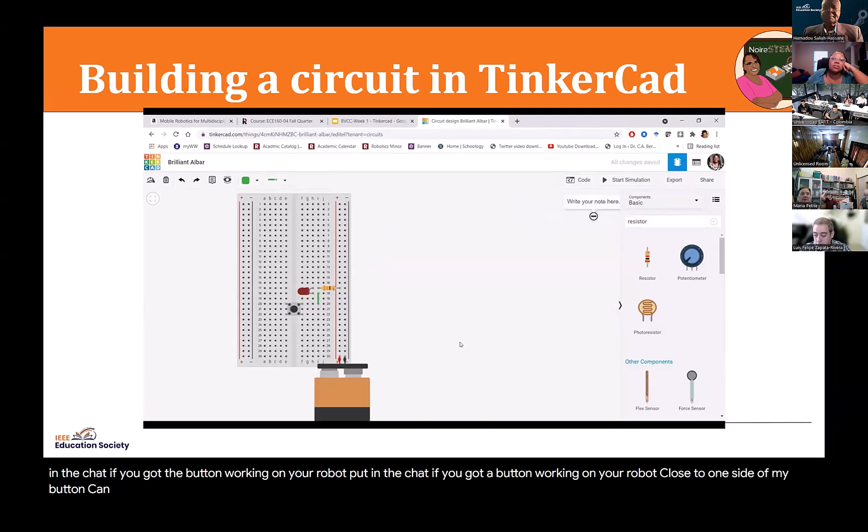So now I'm going to put a wire that goes to one side of my button. And you tell me, where does the other side of the button need to go? Okay. And then I'm going to start my simulation. Why did nothing happen? The light didn't turn on. What's going on? Is it broke? Yeah. I didn't press the button, right? The current's not flowing because I have an open circuit. My pipe is broken. I have to close the pipe so that the current flows.

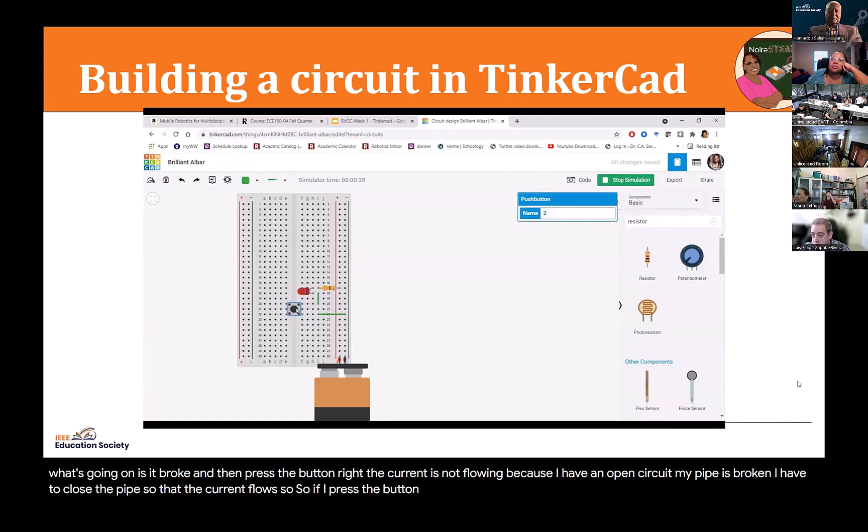So, why didn't it work? Oh, there it is. I wasn't pressing the button, sorry. So if I press the button. All right. You maybe could not hear me over the video. How many of you got buttons working? I'm moving on if you got buttons working. Did you get buttons working on your robot? Yes, I see a yes, yes, yes. Buttons turning LEDs on and off on your robot.

Where can we find the free simulator? The one that I just showed you? Okay, that's called Tinkercad. Let me put it in the chat. This is the one that I told you that I have my students simulate stuff on sometimes. And it is absolutely free. I'm about to put it in the chat. Okay.

It's called tinkercad.com. There is also another one that you can use with kiddos to simulate robots. There's a couple others. I'll put that in the chat as well if any of you do stuff with kiddos. This is another one that simulates robots when you write code. And the other one is scratch.org, I think, simulates robots as well. So any of those work for that. Okay. All right, let's keep going.

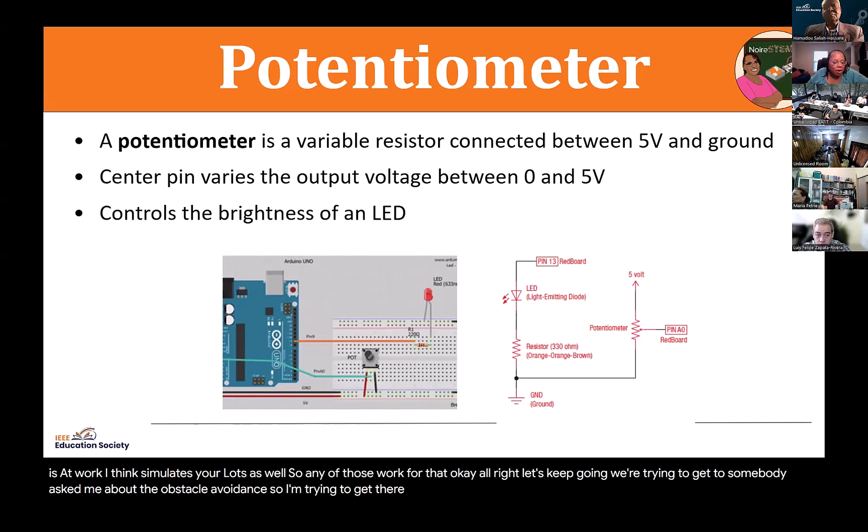Somebody asked me about the obstacle avoidance, so I'm trying to get there. We have about 1 hour left. But I have to make sure you understand the basics of wiring as well as digital and analog. Okay, so the potentiometer, you got one of those in your kit. That is an analog input. You can use that to control blink rate or intensity of an LED. You could also make an LED dimmer circuit.

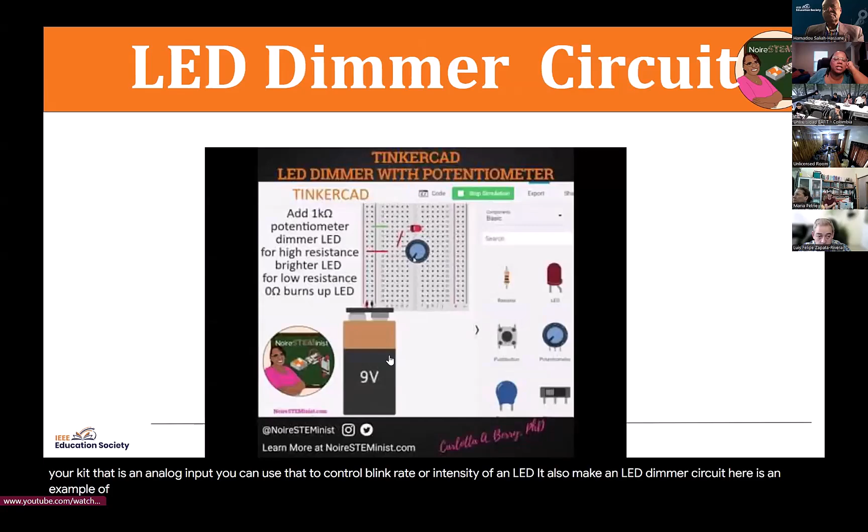Here is an example of the potentiometer working. I won't show the whole video. Uh-oh, that one went to the internet for some reason. I don't know why it did that. So what you see here is when I turn the potentiometer, the brightness of the LED gets dimmer and brighter. It doesn't like this one for some reason. I don't have a resistor in here. The potentiometer was my resistor.

So what you should have seen there is that at the end, the LED actually burned up. It broke because the potentiometer is my series resistor instead of the actual resistor of 330 ohm. So if I turn the potentiometer too far and it goes to 0, there was too much current and the LED burned. Okay.

So things you're going to have to learn to do in Sketch, which is like C++ code, is writing functions to call, like you're going to need a function for get distance to read the sonar sensor. You may need for loops in order to run some code continuously, but a microcontroller also just has a loop that runs code continuously. Sometimes you may use an array. Like if I have multiple LEDs I want to control, I will use an array to do that.

The setup function in the microcontroller is for code you only want to run once, and code you want to run continuously, you do a loop for, and digital write turns things on and off. There's also an analog write for sending out analog data. And there's an analog read and digital read, okay? You also have if-else conditions to determine if a sensor reads a certain condition, and then based upon that condition, you execute something. This is what I said when I do state machines on my robot.

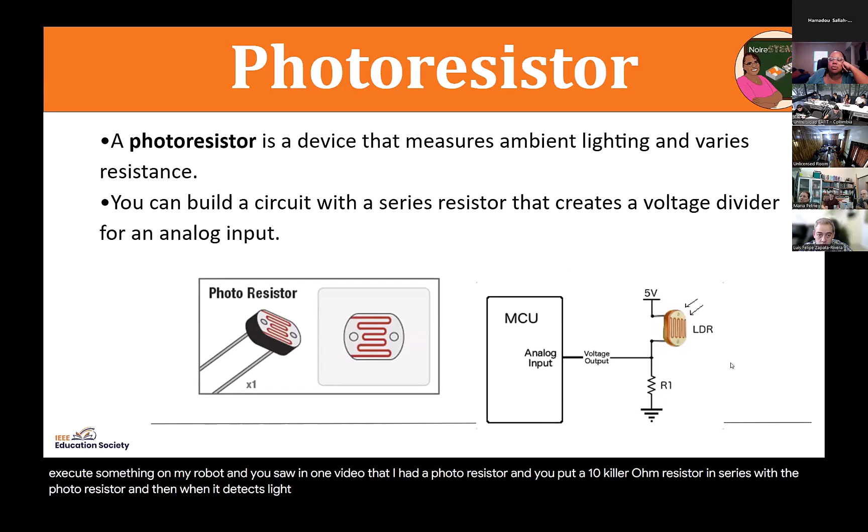I hate it keeps going here. I don't know why it's doing this.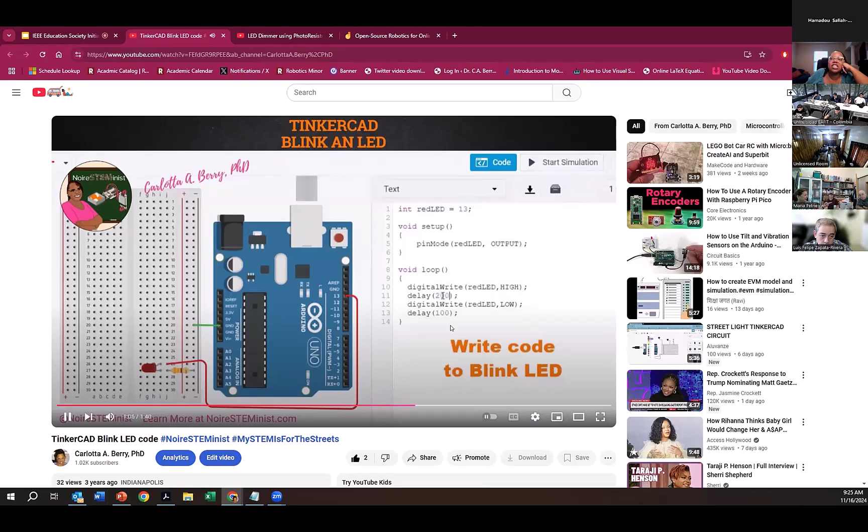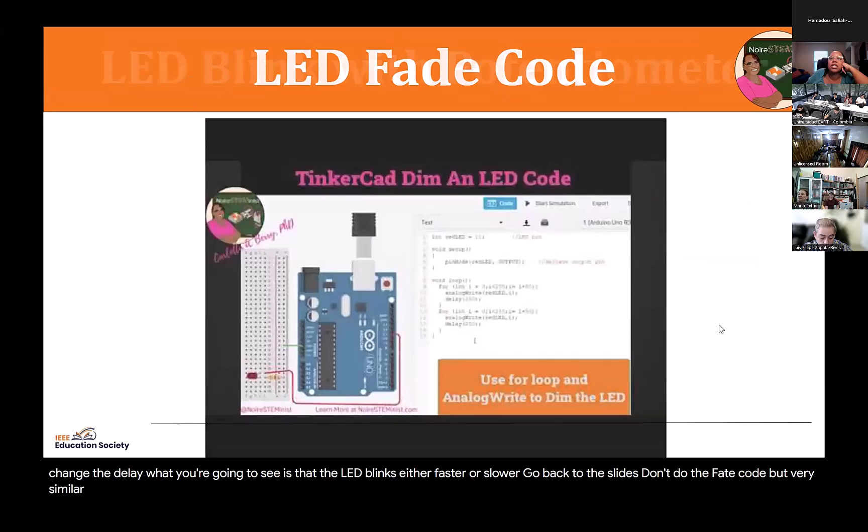And if I change the delay, what you're going to see is that the LED blinks either faster or slower. Okay. Let's go back to the slides. Okay. I won't do the fade code, but very similarly, you can use inputs to make that happen. Okay, I want to get to the point where we're now ready to do something on the robot.

These slides are available to you. So for all the ones that I'm skipping over, feel free to go in whenever you would like and use them, okay? So I have some example code inside of Tinkercad. I'm going to skip to the ones for the robot, but if you want to step back and do any of these others, you can.

So what you're going to see is in Tinkercad, I have one for the LEDs. I have one to play music on the robot. I have one to read the sonar and the photoresistor, etc. But I want to get us to one where we get the robot moving and get the obstacle avoidance going. So that's why I'm going to skip ahead. But you could go to any of these if you like, okay?

And I'll put this, what you do in here. You go to tinkercad.com/joinclass. And the code to join the class is TKXUSPWA6. If you have a Tinkercad account, you can just log into your account. If you do not, you're going to need a nickname. And so I just made all the nicknames robot and some number from 1 to 100. So that's how you would get in Tinkercad in order to try some of this code on your robot.

But I'm going to skip ahead because I want to get to one where we get the robot moving, okay? So what you see here is you take your Tinkercad code, you copy it out of Tinkercad, you go into arduino.cc, which is your cloud editor, you paste it in there, and you download it to your robot.

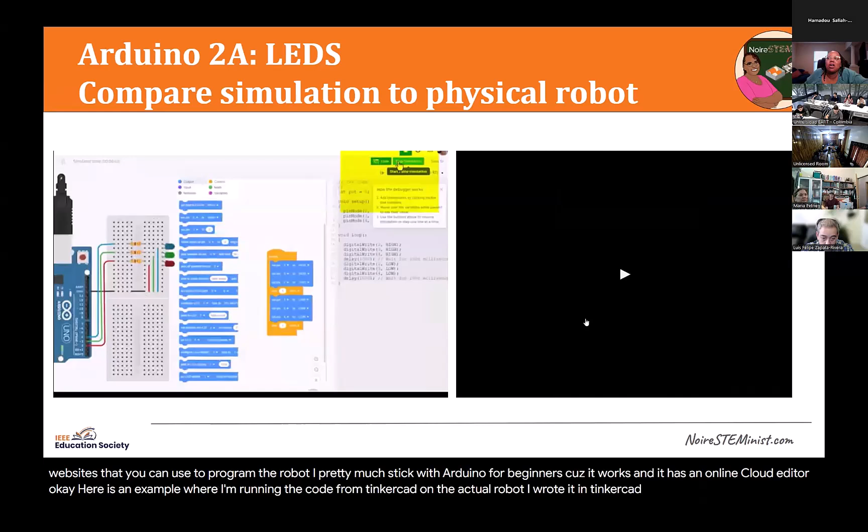So here is an example where I'm running the code from Tinkercad on the actual robot. I wrote it in Tinkercad and then used Arduino and downloaded it to the robot. So I wrote just some blinking code for LEDs, and then I put that code on my robot. So these are running the same code.

So the ultrasonic distance sensor uses sound to detect the distance to an object. It uses time of flight and sound to calculate how far. It sends out a ping and it listens for the echo. And based upon the time it takes for the echo to come back, it determines that there was an object 5 inches, 10 inches, 12 inches away.

When I teach this topic to children, I tell them this is called echolocation, and that there are 3 animals in the world that also use echolocation, like sonar on a robot, to communicate with each other. 2 are in the water, 1 is in the air. What are they? Type it in the chat. This is how I'm waking you up. I'm asking you a question. There are 3 animals in the world that use echolocation, like a robot uses sonar to communicate in the world.

Whales and bats are great. Dolphins, Maria gave it to me. I was about to say, I haven't seen the 3rd one. Dolphins, very good. Dolphins, whales, and bats. So if you're going to be doing anything with kids, that's a great kid question. Porpoise, I didn't know porpoise. I may have to look up porpoise. Porpoise and shark, I didn't know about those 2. I got to look those up.

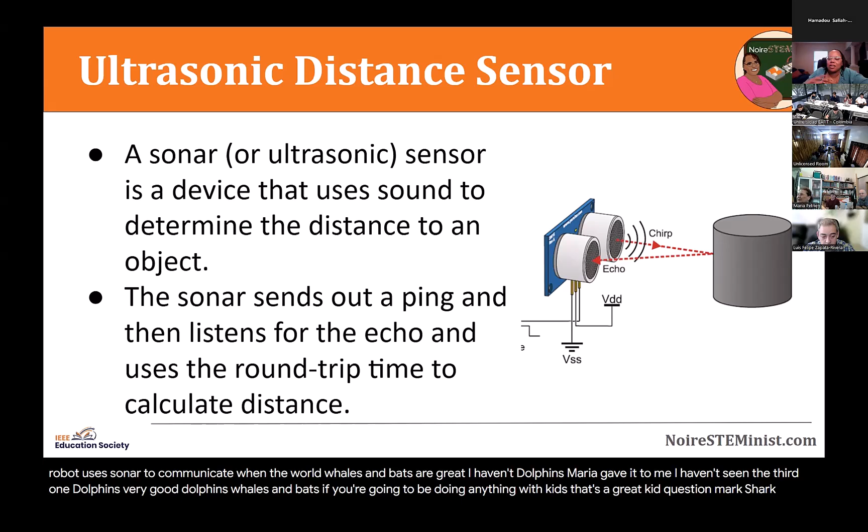Okay. So we're ready to build the sonar circuit. I'm getting you to the point that somebody requested in the chat. How many of you have your sonar circuit built already? If not, this is where you should be right now. We are building the sonar circuit.

What I want you to see here is before we connect the motors, we want to make sure you have the sonar working. So you are going to connect the trigger and echo pins of the sonar to pins 6 and 7 on your Arduino. You made it up, Maria. VCC goes to 5 volts. GND goes to ground. Okay, let's get your sonar sensor working.

This is for, who asked me about the sonar sensor? Somebody in the chat asked me about the sonar sensor. Abdul Aziz. Abdullah. Okay, so if you have not done this, you need to do this now because we're about to get the sonar and obstacle avoidance working. This is the last task we're going to do today because I'm assuming up to this point, you've gotten most of it done. You can also connect one LED.

You don't have to connect all of them unless you want to, but I normally use an LED as a visual output that the sonar is working correctly. So if you have a sonar connected and you have an LED connected, then as you move your hand, we should see the light turn on and off if the sonar is properly reading. Put in the chat if you have done this.

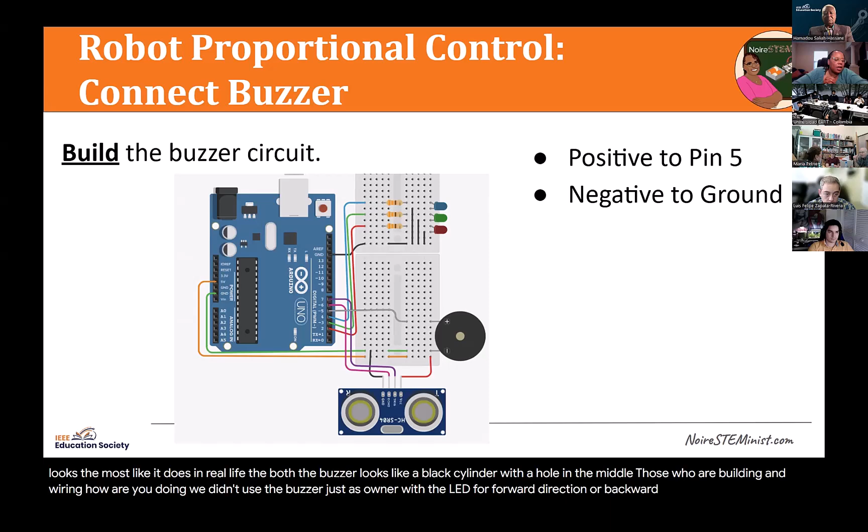Okay. Those who are building and wiring, how are you doing? We didn't use the buzzer, just the sonar with the LED for forward direction or backward. Okay. All right. Sounds good. They're making a suction chamber where the pressure difference is produced with the help of a DC motor and a blade made in 3D. Oh, cool. All right.

Unfortunately. Oh, okay. All right. Everyone should have a chip in their kit. A chip in their kit. It's blue. Yours is not red like this. Yours is blue. The wiring's going to be a little different though, but I think I can help you with it. So let me try to do that.

So some of the wiring is the same. So remember, when you put the chip in, it needs to straddle the ditch in the breadboard. So it needs to straddle the ditch so that one leg is on one side, the other leg's on the other. Like I said, your image may be a little bit different because you have a blue motor controller. It's TB6612. So some of the wires may be a little different.

The main thing is make sure that pin 8 goes to AIN1, pin 9 goes to AIN2, pin 10 goes to PWMA. Okay. And also that pin 11 goes to PWMB, pin 12 goes to BIN2, and pin 13 goes to BIN1. Now, because your chip's a little bit different, you may not have this motor A01, A02. You're just going to have right motor to motor A, left motor to motor B. Yours may just say motor A, B, and motor AB or something like that. Unfortunately, my robot is downstairs, but so that may be the only difference.

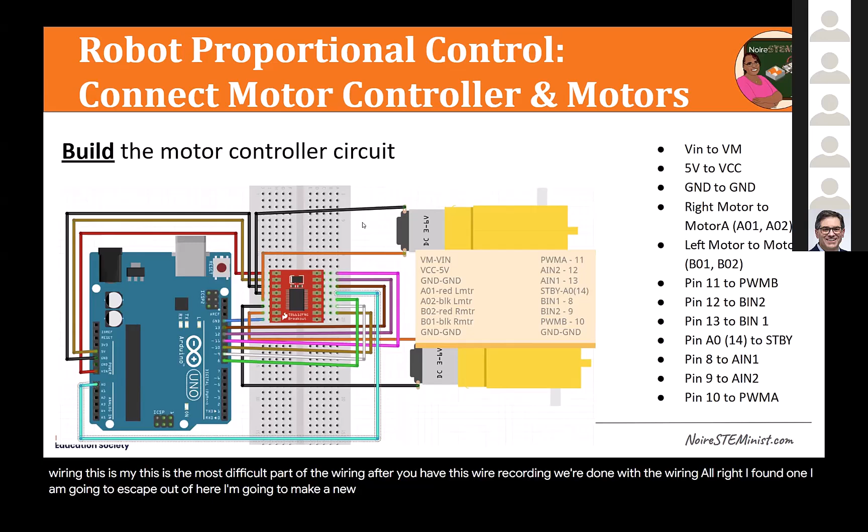All right, I found one. I am going to escape out of here. I'm going to make a new slide and I'm going to put an image on it. So give me 1 second. Okay, so there's going to be more on here than you need, but hopefully it's helpful. So it's going to be the exact same stuff as this.

And then hopefully I can't see the chat while I'm doing this. So hopefully my great team is taking care of the chat as well. Hamadou, Maria, and Luis, you're my great team. Okay, so

I'm going to send you another image. And I made these images in Tinkercad and Fritzing, if you're wondering how I make the images. Okay. And while I'm doing this, you should be able to look at the actual slides, since I know I am on a screen you can't see right now. Okay.

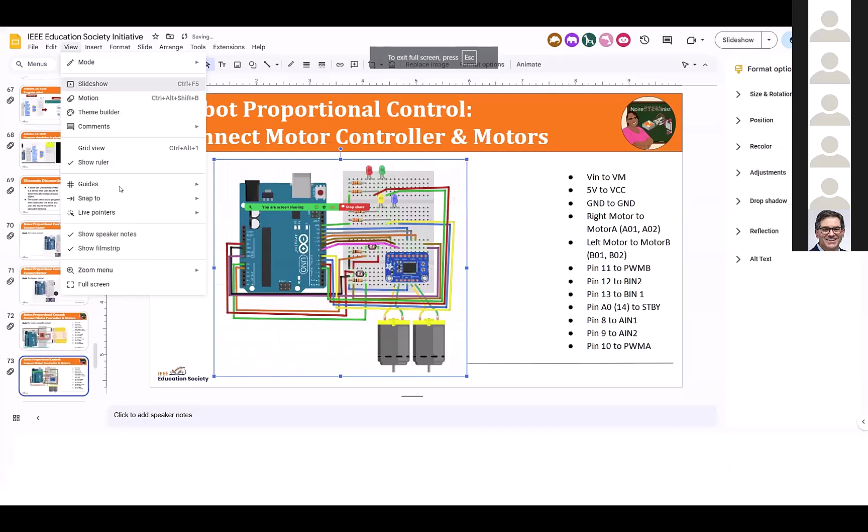All right, so I am going to go back to the slideshow. So like I said, there's a lot going on here, but the main thing I want you to see here is that this is your motor controller. This is your motor controller here. So one side, you're going to have left and right motor AB, and on the other side, you're going to have right and left motor AB.

It doesn't necessarily matter so much the order right now, because if the robot is moving backwards or a way that you don't want the robot to move, then we just reverse the wires, okay? So what you're going to do is right motor to motor A, but you don't have these numbers on your controller, so I'm going to take that out. And left motor to motor B, you don't have these numbers, so I'm going to take that out. And for the controller you're using, there is no standby, so you don't have to worry about that either.

So that's what you're doing right now, is you are putting the motors on one side, and then you just need a ground. You need one ground connected. And then on the other side, you're going to put VIN to VM. That's that purple wire. You're going to put 5 volts to VCC. That's that brown wire. And then you can put the ground either here or on the other side.

Then after that, there's going to be PWMB, BIN2, and BIN1. And you see the connections here. Then you're going to skip standby, and then you're going to do AIN1, AIN2, and PWMA. Okay, I am going to the chat now to see how everyone is doing. Okay, so there's your controller. Those of you who have a robot and are following along, give me an update, please, so that I'll know if it's time to move on or not.

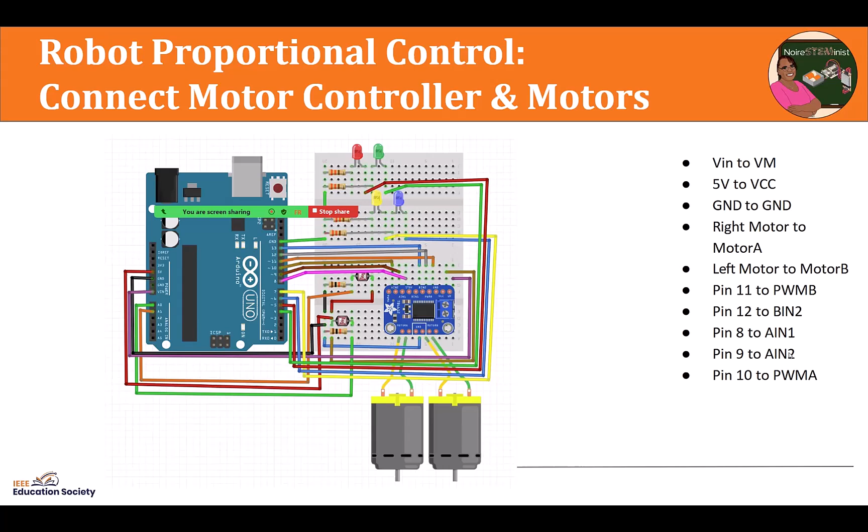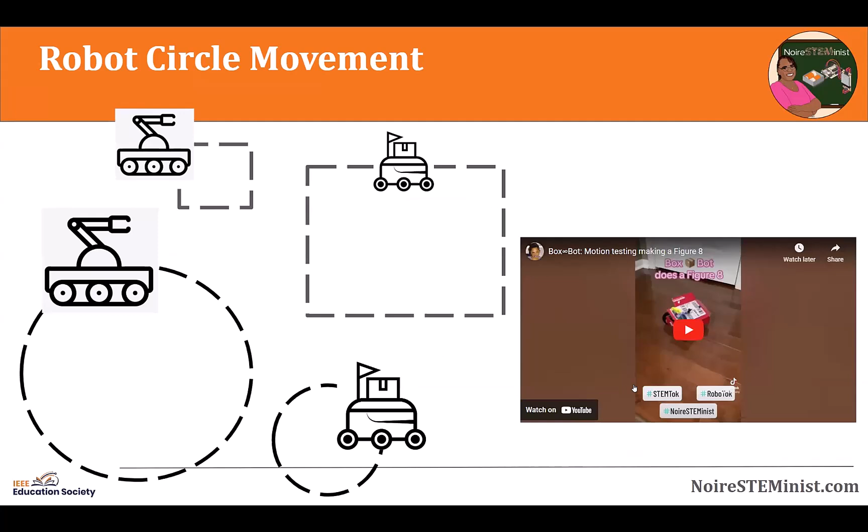Figure 8. So after circles, we do a figure 8. This robot has a lot of odometry error, but that's an example. So my students will do squares, figure eights. We'll talk about odometry error and that you have to use encoder feedback to correct for odometry error. Odometry error basically means as the robot moves, it gets off more and more from being able to hit its goal.

Okay, so now you have, in theory, wired your robot. You've wired your sonar and one LED, okay? I will let you know right now, do not upload any code to your robot unless you have it on a test stand. Otherwise, you will drive it off the table and it may drag your computer with it.

The other thing I will tell you is that a good habit is to always insert a 5-second delay in your code. So in case you want to drive your robot untethered on the floor, if you insert a 5-second delay in your setup function, you know you always get 5 seconds to get it unplugged and on the floor before the robot moves. But you always want to do something to make sure that when your code runs and executes immediately, you don't drive the robot off the floor, drag your computer off your desktop, etc.

Okay. I am now going to show you a simulation of this, and then I'm going to Tinkercad and walk you through the code, and you can then download that to your robot, okay? Proportional control, simulation testing: buzzer, LED, and motor speed change with distance from sonar. So it's hard to see, but as this distance to the sonar is changing, the RPM... so loud. Hold on.

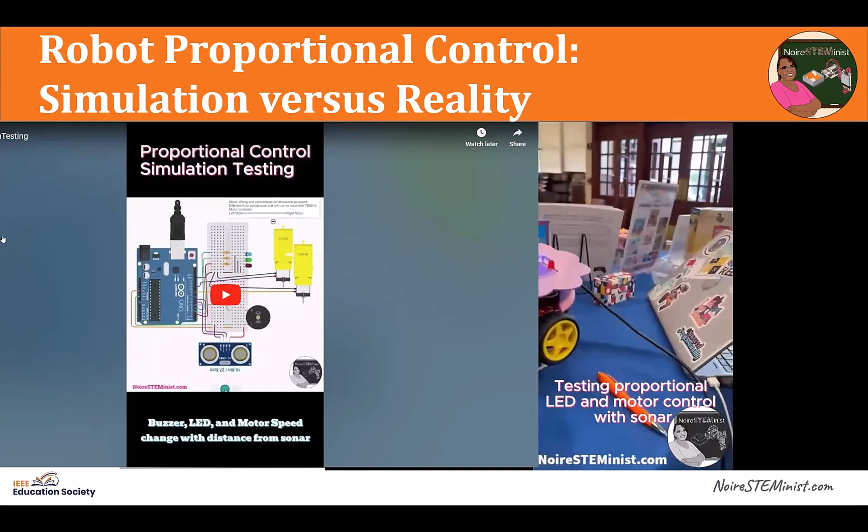So this is also an example of how I multitask. I was actually at a book fair selling books, programming robots. So that's why the background looks like that. I was in a Barnes and Noble, if you guys know what a Barnes and Noble is.

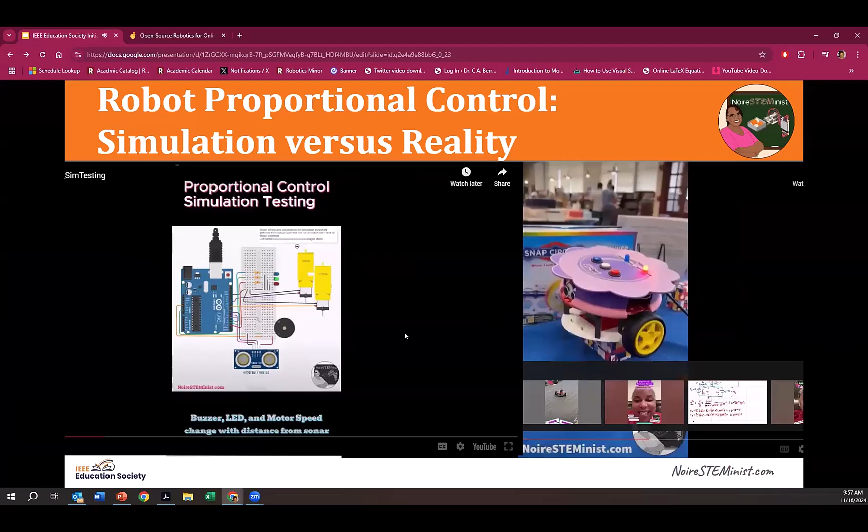Okay, so proportional control. Moving on. I think we're ready to go look at the code. Simulation test, see what my next slide is. Why is this going crazy? LED and motor speed change with distance from sonar. Hold on. Sorry about that. Okay, I was going to ask another question, but I think I want to do some coding.

We have about 20 minutes left. I want to do coding, and we're going to end with this last question in the chat. So before we do that, let's go to Tinkercad and make sure everybody gets their obstacle avoidance working, and then that'll be my conclusion, and my workshop will be done. So let's go to tinkercad.com. We're going to go to that classroom that I mentioned before. And remember, if you don't have an account, you can create one.

So I'm logging on. And I also do 3D printing in here. So Tinkercad, I do 3D printing because my robots are 3D printed. So sometimes we design the files. Like you may notice, this is one of the files you got for your robot. You have a micro:bit. We also have code. So here's some of the simulated code that you saw.

And now what I'm doing is I'm going into my classroom that says Robotics Workshop. This is the link that I sent everyone. So whenever I do a robotics workshop, I use this link and this code, and I'm putting it in the chat again so that you can now get into my Tinkercad classroom.

And I'm going to go to activities, and I'm going to go to the activity that we can use for obstacle avoidance. So that one is Arduino sonar for distance sensor 2D. I don't think it's 2D. 2E, no. Where's 2F? It should be 2F. Where is 2F? It might be this one. Don't remember. I haven't done this in a while. No, that one doesn't have the motor.

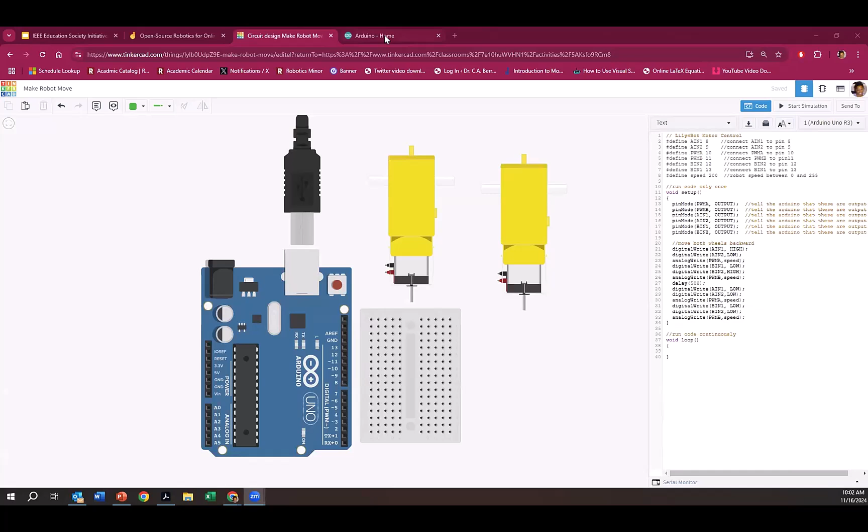So you're going to copy it into, let's see if I can get the internet back. You're going to copy this code into arduino.cc. Let me put these links in the chat for you. I'm going to just send this link directly. So you're going to take this link, open it up, get the code out of here. And you're going to go to arduino.cc. I'm going a little fast, so let me know if you can't keep up.

And once you're in here, you're going to have to create an account. I don't think it'll let you code without an account. So you're going to go in here and I'm going to sign in. I have several accounts. I'm going to sign in with this one because one of them I probably already have the code in here. Okay. Once you sign in, you're going to go to software, go to cloud editor.

Some of you said you had already been programming, so you probably are past this point, but go to Cloud Editor. Okay. And now the code I just copied, I'm going to put into a new program. What I was saying before is that even if you do the Cloud Editor online, it's going to make you download an agent to talk to your robot. Okay. So that's what you've got to do is download that agent.

But let's assume we did that. Like I said, my robot's not even up here with me. So I've done this before. Here's now where I have copy and pasted this code into a new program. The first part of the code is just where everything is connected. So AIN1 is on 8, AIN2 is on 9. This is the exact place where you connected all of those motors.